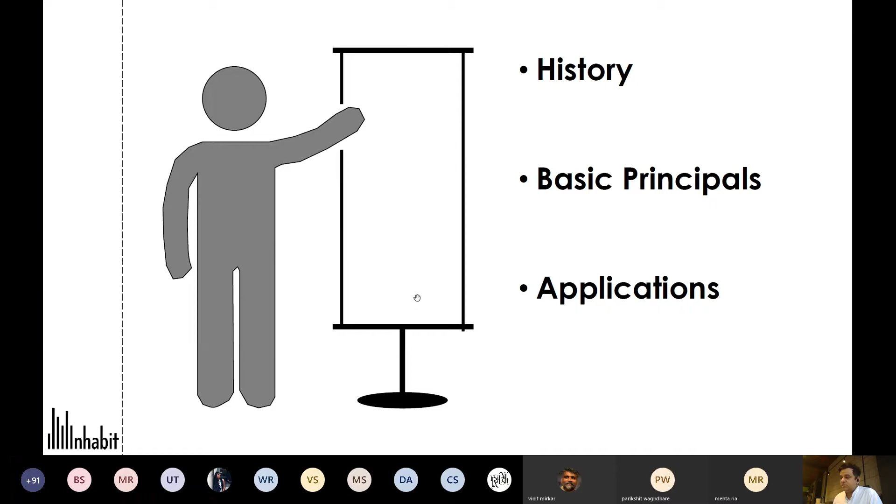Facades, as we know them today, have evolved from a large industrial revolution per se, a large evolutionary process from production to usage. And glass back in the days used to be something very simple, very ethereal, very divine, limited to being used in churches. Even castles of kings used to have very tiny windows, because glass was not available to builders as an industrial material per se. So we saw its very limited usage in mosques and in the form of stained glass in churches, which brought in this divine light, providing divinity to the space.

Glass's evolution into buildings started somewhere close to the early 1500s, when the float glass, the sheet glass that you can buy today for your windows or doors, was not available yet. So the glass blowing industry in Central Europe was the point of conception for procuring glass for buildings. They would take a blob of glass at the end of a stick, as in the image to the right, and keep spinning it till it reached a diameter of about 3.5 or even 4 feet. It solidifies, it cools, and then you would break it at the center point, and that would become your sheet of glass, a circular disc that you would use in your buildings.

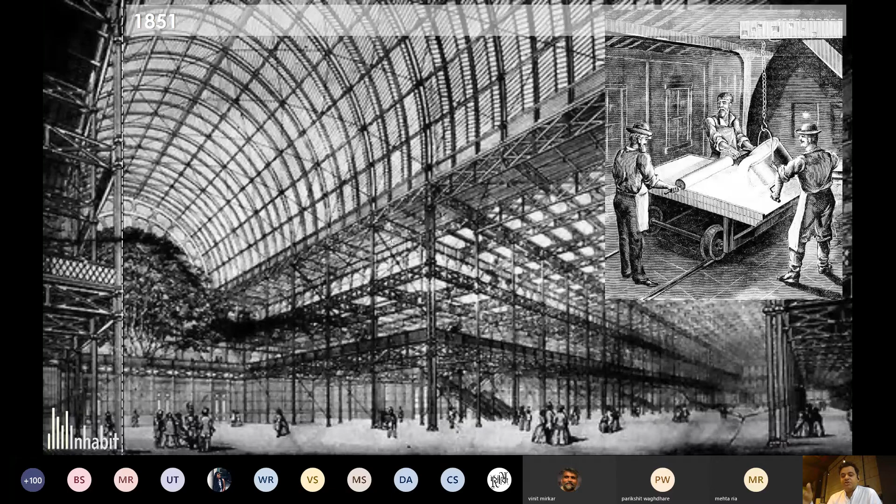Now, when the Industrial Revolution happened in the mid 1850s, steel manufacturing was at its peak. We were manufacturing steam engines, steel girders, large cast iron components, and the picture in the center is the Crystal Palace in the UK. The Crystal Palace is a great placeholder for facade engineering today because there were a lot of firsts that building achieved. It achieved prefabrication. It achieved the first use of glass in an overhead skylight and even on the walls. And given that they didn't have the technology we have today, the entire building was reverse engineered from the largest piece of glass that you could cast.

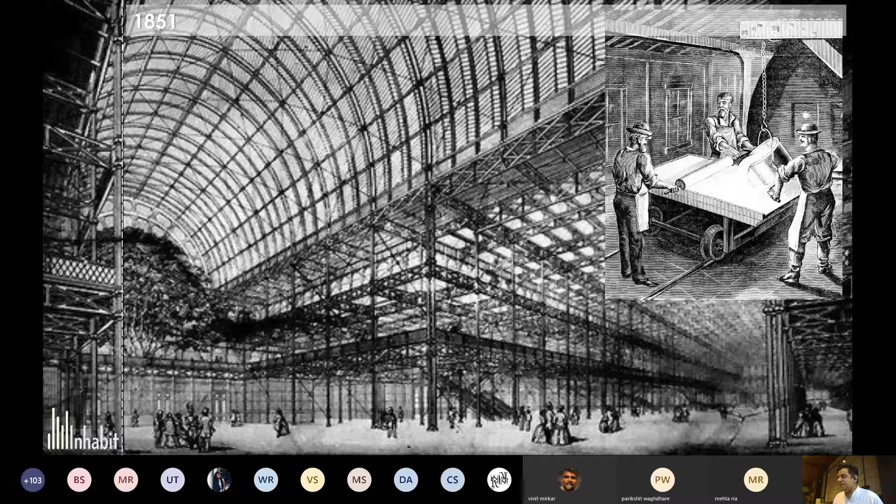The technology being limited, they would have people in an enclosed, fully insulated room. They would heat the glass to such high temperatures that it would become completely liquid, and then pour it into a large cast. By the time it solidified, they would start rolling it, and when it's completely solid, it's ready to be used. And there were obviously limitations on how big a cast you could make. So based on that, the entire building was designed backwards. And that's what you see here. All these panels are glass cast with this method, a simple timber cast that you would pour molten glass into.

Then came the mid 1950s. I think glass was still very, very limited in its usage, because the Crystal Palace was more of a power showcase that this is what the industrial world can do, but it still did not come into play in mainstream buildings. So buildings still had tiny pieces of glass, or no glass at all, or timber windows for that matter.

1952 came a big revolution, and I think we really owe it to this man. Alastair Pilkington is his name, and there's a glass company that runs by his name now, who invented the float process, the float bath process. Now, glass by itself was rolled, and then they started rolling it on conveyor belts, but that led to a lot of distortion in glass.

So you could see a very distorted image of the sky outside, or if you tried to look in, you would see a lot of distortion. So I think the clarity was desired, where you can see this pristine view to the outside or have that visual connect to the outside. So Mr. Pilkington came up with an idea where he basically floated a really semi-solid sheet of glass over a tin bath.

Now, tin has a lower melting temperature, so the higher melting temperature of glass always made sure that the tin is in a molten state, and it would just float it over tin and then pull it from the other side. That made sure the glass was really flat, and then the rest is history. Mid 1952 onwards, we've produced glass with the exact same method, even till now, 70 years down the line.

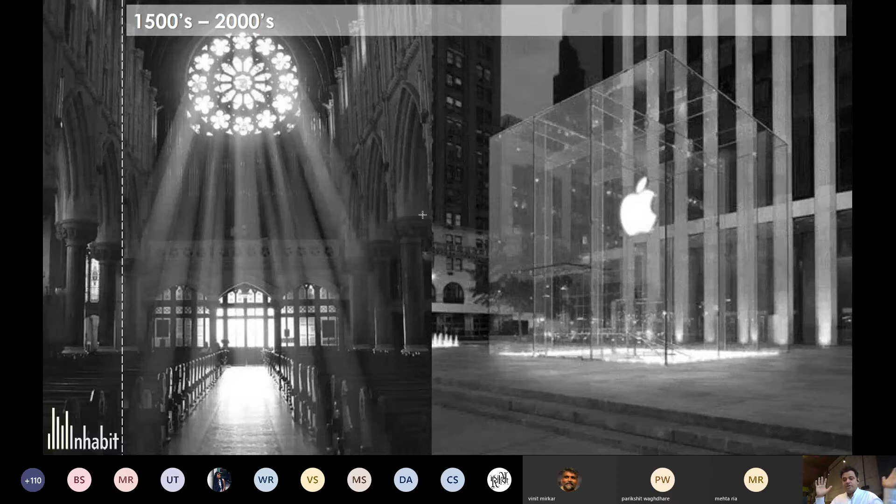So from the early 1500s, where we would spin a disc of glass and try and cut little pieces out of it, put them in our windows, all the way to now. I mean, the Apples of the world are basically using glass as a structural component by itself. There's no visible steel, there's no visible concrete. We have started to understand the material a lot better. We've started to understand the processes that make it structurally more superior, environmentally more superior, for us to use them more extensively in our buildings.

So that I think sort of sets the context of where we are currently in terms of technology, and how we are going to use that, and based on our understanding, what are the basic principles of curtain wall design or external facade design. So the first component that I will walk through is the outline principles of all the different factors that we need to keep in mind while we're designing facades. So this is what we call a typical hierarchy of all the design parameters that we need to take care of.

So normally what happens is you need to make sure that the facade is structurally sound. It should be able to deal with winds from the outside. It should be able to take loads from the inside if someone leans on it, if a child throws something at it, etc. And it should be able to sustain the building loads moving left and right. It should not warp or it should not D-shape itself. So structure is obviously important because if the facade doesn't stand, the next stage doesn't arise.

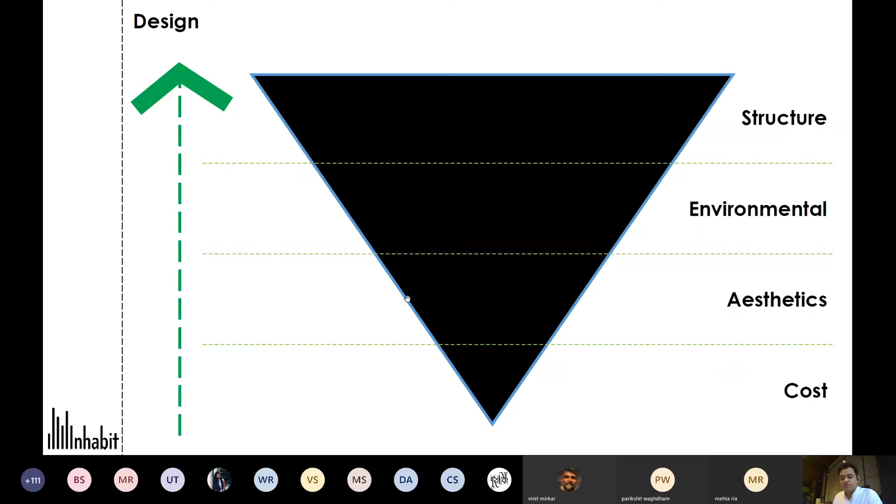In our experience, what typically ends up happening is this. We start with a budget, and this is the hard reality here. So we start with a budget. This is how much I can spend, and here's my render. This is what the building needs to look like, and then I want a LEED Gold certification, and then yeah, you deal with the structure. So the right approach is to start with structure, and then obviously look at the cost as an element, and then if required, you revisit the entire cycle again. But unfortunately, this is the sequence that normally gets followed.

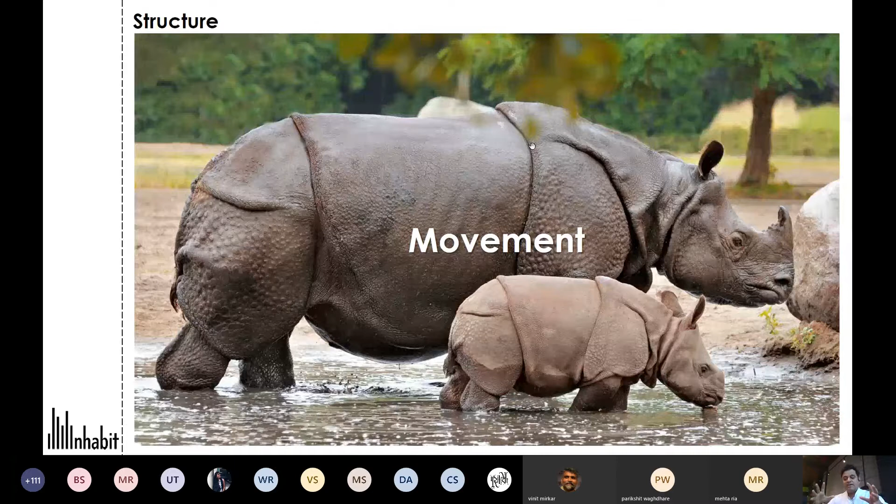I mean, the rhino is a fantastic animal. You can imagine the ground it sits on is the earth you build on, and with any kind of geotechnical forces or seismic forces, the rhino basically just moves around to adjust to them. The body of the rhino, the bones, the muscles, etc., is the structure, and the skin is the facade. Now you suddenly start seeing there are little folds on the skin which basically move around and about. Now they are not restricting the rhino to move; they're actually giving him a very robust outer shell. But when he moves around, the skin folds over and moves around and about, to allow for movement, but at the same time give him a nice robust shell on the outside.

So we'll look at the first principle, which is the building structure, and how do we cater to different movements or different parameters that the structural engineers provide to us. So structural engineering will be another session for you guys, and a lot of this will link back to what my colleagues from the structural engineering team will share with you.

So first, a very important aspect with tall buildings is wind gets faster. Wind has less resistance at a good height, so it actually hits the building face on. And then that has an impact on the design of the facade based on the way the building moves and also the facade's own structure. So the facade obviously has to be self-supporting, and when the building sways, like a rhino's skin, it has to be accommodating that wind movement within itself without taking any stress or any strain of the building's movement onto the facade element itself.

You have live loads that come into play. Suddenly someone decides to put a grand piano next to the window, and that will have slabs deflecting, etc. There'll be user loads where you have a large party and that will have some structural impact. There will be dead load impact, where you have a short-term settling, where the entire weight of the structure will make the building sink slightly, and the columns will shorten slightly, and there'll be a long-term usage creep as well.

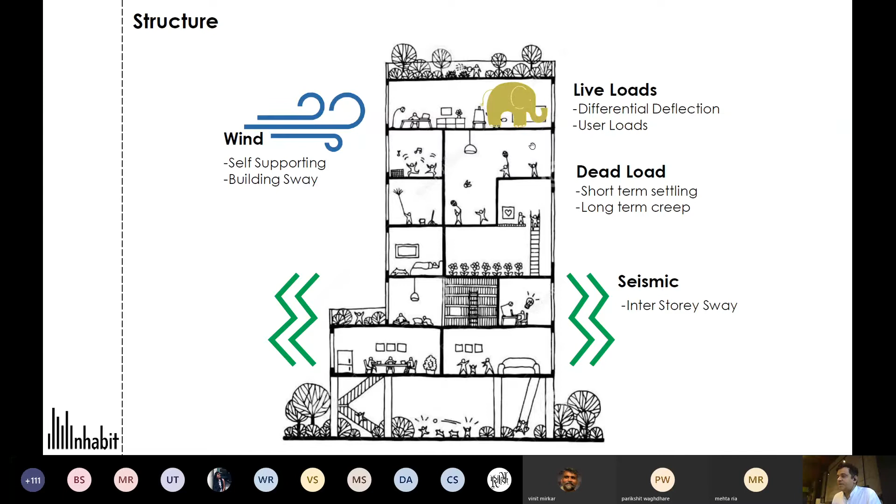So normally when we talk about high rises, the choice of system is based on the feasibility of design and installation. And normally when you look at high rises, you see them fully glazed, and the choice is not because the architect wants it glazed. The choice is because you want to install something that has the minimum amount of site work involved. So we choose a curtain wall that basically gets installed from the outside.

What you see here is a typical panel that gets installed between floors, and then there is a movement joint. So there's a stack joint which is allowing some movement here, and there's another stack joint that allows some movement here. Now, the vision component, which you look out through, the piece of glass that brings in light and allows visibility to the outside, is anywhere between the floor level all the way to the beam soffit level. Anything above that, that covers your services and your structure, is what we call a spandrel.

So that is basically the composition of a single unitized panel, and the joints are really important. That's how you design them, to allow for any thermal movements or the building's physical movements or any differential load movements, and I'll come to why that becomes important in a second.

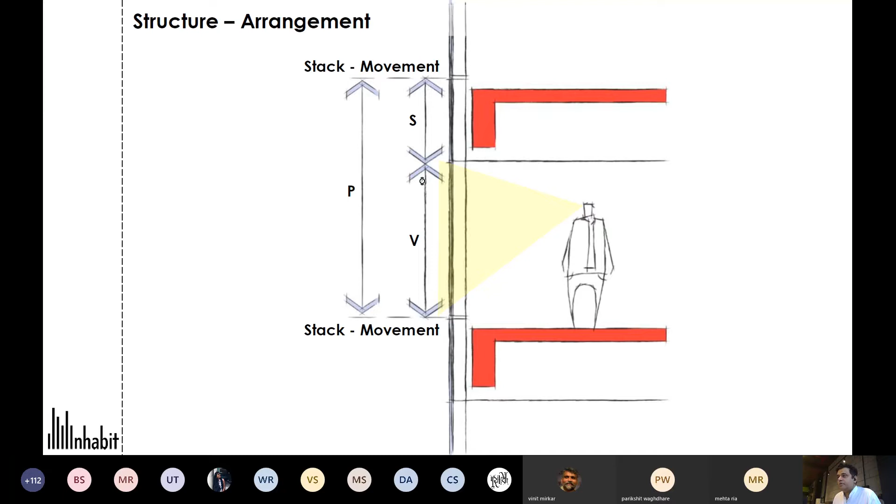So the first component obviously is the dead load and live load. The structure will shorten itself over the course of years, and there'll be times where somebody may decide to put an excessive load on top. Parking structures suffer this a lot, where someone decides to park a Rolls Royce next to the parking block, and then suddenly the slab deflects there. The idea here is that if the slab deflects, this panel moves with it, and that allows for movement within the stack here.

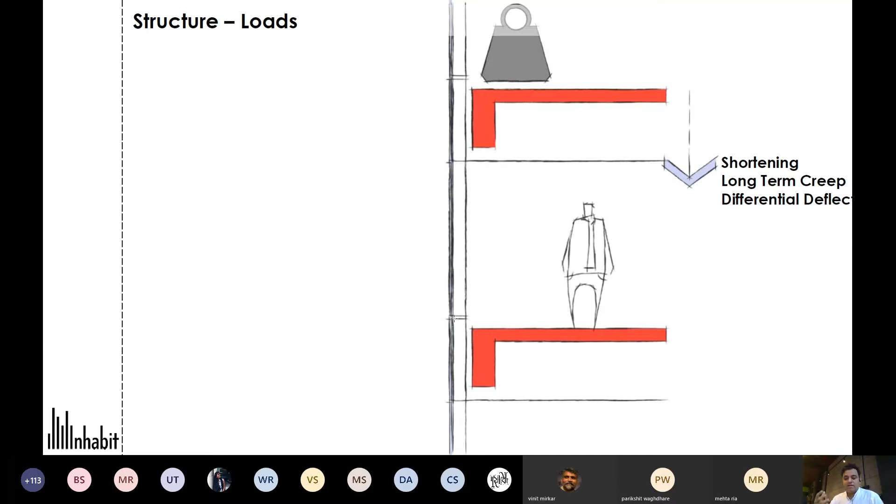So the entire thing, like I said, is the skin of a rhino. There should be enough movement allowance there for you to be able to take any load or any unpredictable behavior of the building.

The facade obviously has to be self-supporting. So between floors, you have to design it in such a way that these independent units can deal with external wind loads and internal barrier loads, which become very important in buildings that are public in nature, where suddenly, to see the fireworks outside, a lot of people start leaning on the glass. So it all has to be designed for those sorts of loads as well. So we talk about fiber stresses in the material. We talk about deflections that should be within allowable limits.

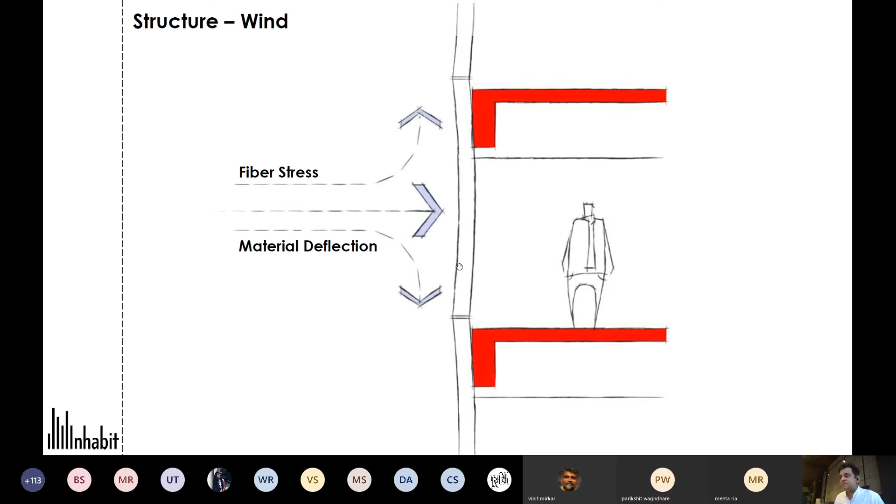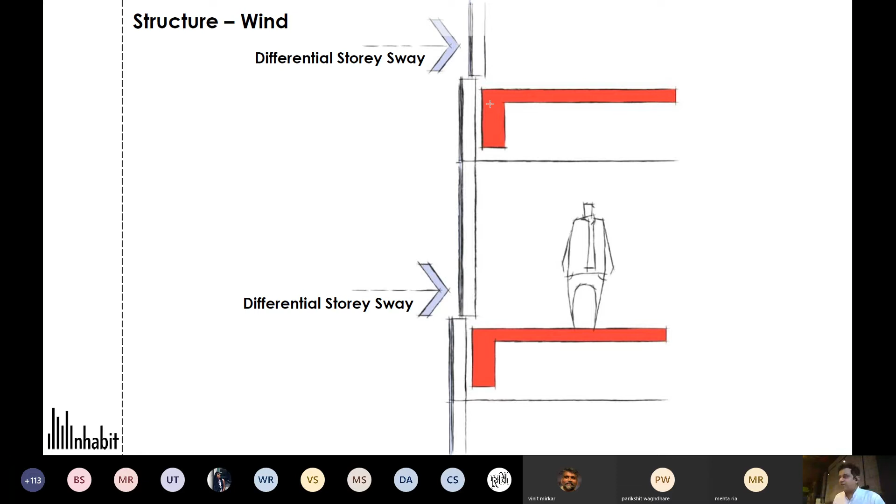Buildings sway differently, so it's hardly noticeable, but the behavior of a building is very different under high wind velocities, where it tends to sway left and right, which means one edge of the building will start to curve, and that will basically make the facade panels start to open up a little bit. So differential story sway: one story may sway by a few millimeters more than the floor below, or the one above may sway outwards by a few millimeters more than the floor below. All that needs to be accommodated, and that's where the play of these panels comes in.

Seismic is another different animal altogether. It's another different building load criteria, which behaves very differently. In a seismic event, the building floors actually tend to go in opposite directions. So one is going left, the one above will go right, the one above will go left. So there'll be very quick succession movements happening in the building, and the facade has to be designed to accommodate those loads.

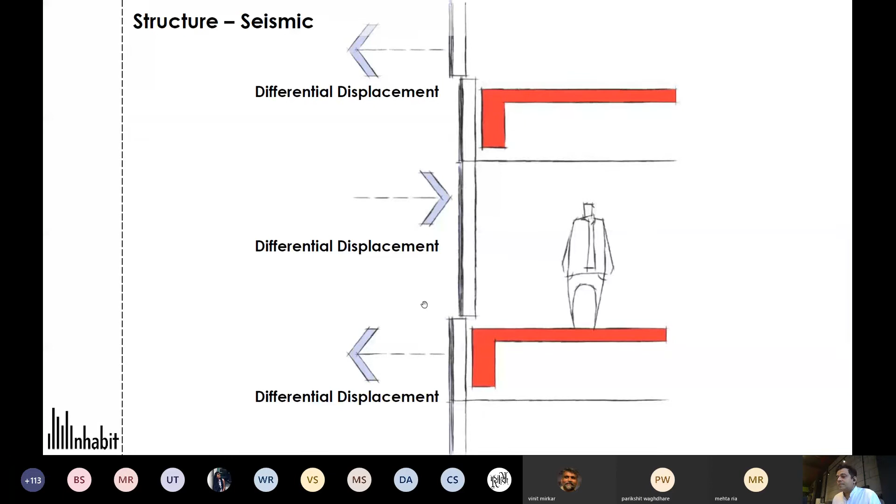So these are the structural design criteria that you need to be mindful of. The second component is again extremely important, because your facades are the first line of defense from any harsh external environment to the environment that you want to create on the inside. And this is not just limited to the elements on the outside, it's also to do with fire, it's also to do with explosions. I mean, we live in a world full of threats right now. So what if a bomb goes off next to your building? How does that impact you on the inside?

So there is rain, which is a factor. In the place where we live, we see leaky windows everywhere. So obviously the facade has to be watertight. There are potential opportunities for rainwater harvesting as well, because the facade is a really large surface area of your building, and as the building goes taller, the opportunity of harvesting water on the rooftop is very, very limited, but you can actually do more of it on the facade.

In terms of solar performance, the sun not just gives us light, but it also leads to a lot of heat gain. And the higher you go, the less are the opportunities for you to have outdoor spaces, because the wind can really cause havoc. So having a balcony at the 70th floor is less and less feasible. So the facades tend to be very closed down with very limited ventilation opportunities. So again, you need to make sure that the sun does not heat up the internal space. So the sun obviously brings in daylight, but it also brings in thermal gains.

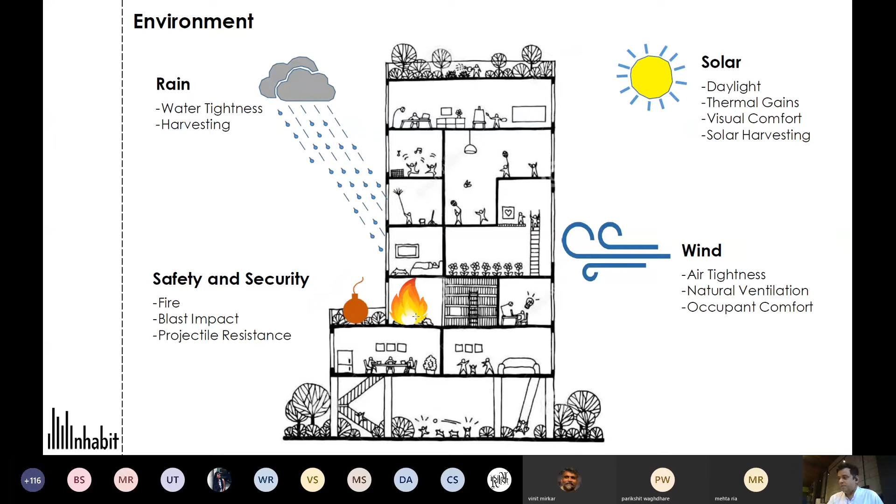At high rises, at really tall heights, especially sky terraces, etc., the wind can be an uncomfortable factor as well, where it's sometimes too high speed for us to feel comfortable there, because it basically pushes people around. So let's look at each of these elements in a little more detail.

So when we talk about the solar factor, or the sun's behavior around the facade, there are two key factors that we consider while designing facades in a tropical climate like ours. One is conduction, where outside is 38 degrees, 40 degrees, and inside is a comfortable 22, 23 degrees. And because there is a temperature difference, there's a delta. The facade will tend to conduct that heat and then radiate on the inside. And that is defined by U value.

U value basically defines what is the conductivity of your facade. The lower the number, the lower the conductivity. The higher the number, the more it is conductive, and the more it actually adversely impacts the performance of the facade. Now, in tropical climate specifically, we are blessed with a lot of sun right through summers, not so much in monsoons, but winters as well.

And one of the factors that really impacts the design of buildings here is how clear your glass is, or how much radiation it allows to come through. So conduction is purely temperature outside, temperature inside, the delta, and how much conduction happens between the two. And then radiation is where the light shines right through the glass, hits the surface on the inside, and then heats the room that you're occupying. And radiation is defined by a factor called the shading coefficient.

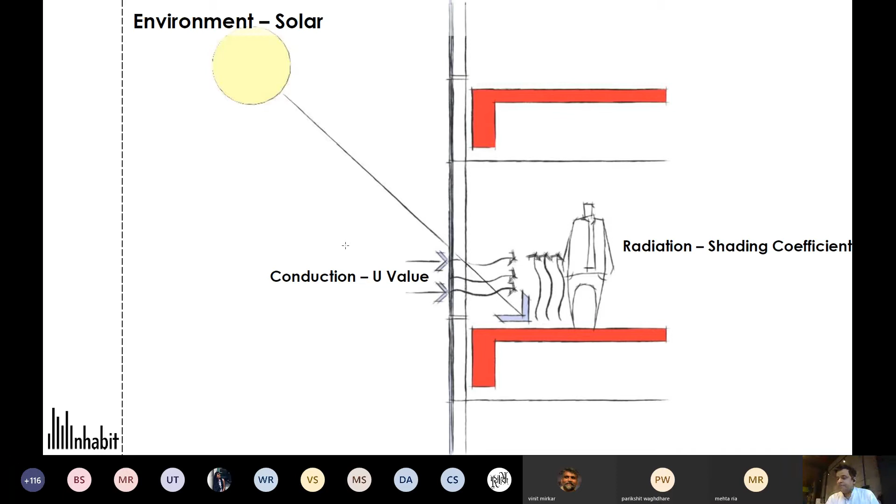Now, shading coefficient is directly linked to the performance of your glass, which may have some tint to it, which may have a performance coating on it. And in some cases, because glass is now being extensively used on buildings, a lot of architects and environmental engineers and people like us even come up with shading strategies where we have external projections or vertical fins, depending on what orientation your building is in.

So improving insulation means lowering the U value. Now, by lowering the U value, you would need to introduce lower metallic exposure to the outside. You might want to use double glazing instead of single glazing. You might want to introduce argon gas infills or other inert gas infills in the cavity.

For external shade, for lowering the SC value, like I said, you can actually improve the performance of your glass, but given the extensive use of glass, there may be a secondary strategy of introducing external shading as well, which again lowers the SC value. Now, I know there are most speakers who will talk about green buildings, about environmental performance as well. They might go into how to orient your building correctly. So we work hand in hand with them to find the best orientation, and then we work out the best shading strategy for the building.

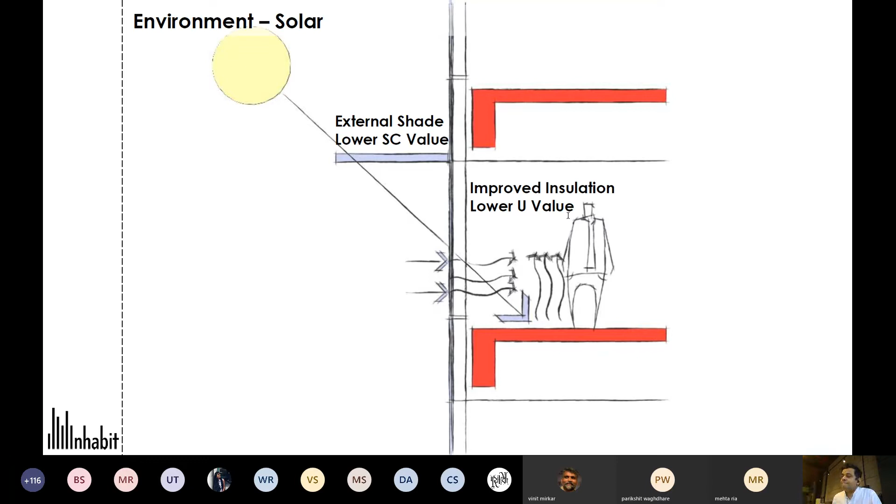Environment: watertightness is extremely important. People do not like leaky buildings, leaky windows. Water you want to keep out as much as possible. So for that, the facade has to be externally drained. Now, with unitized curtain wall per se, what we see here, each of these individual panels is designed with multiple chambers within it, and we can probably have another class on how it actually behaves in an external water exposure. Each of the panels is designed to be drained externally as much as possible.

So if the water comes in, it does not come all the way in. There are a few barriers before it comes in, and by the time it goes down, it gets spit out of the building. Another important factor, which is to do with aging of the building, is the facade should not have any perfectly horizontal ledges, because in an Indian context, there's a lot of environmental floating dust. There's a lot of suspended pollutant material, which tends to sit on these ledges, and every time it rains, it drains down, streaking the facade.

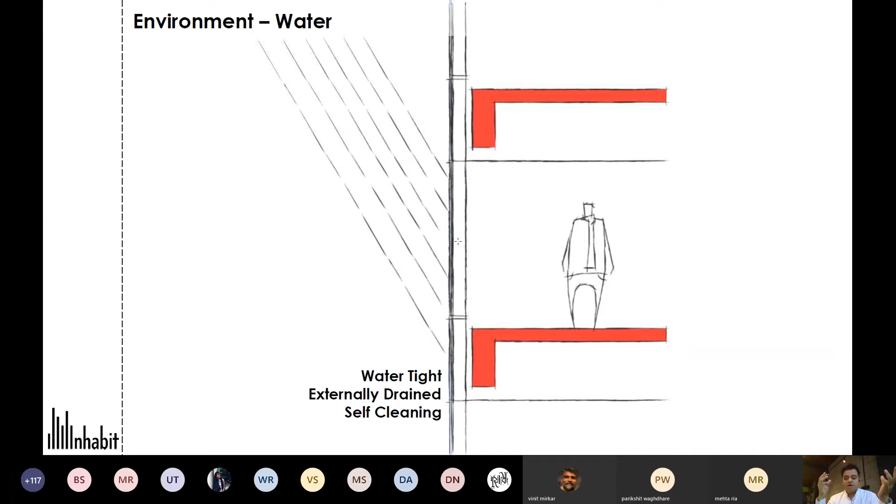So the intention would be to have inclined ledges, inclined shades, inclined features on the outside, so they have some level of self-cleaning nature. Even having the right materials is very critical. So having coated aluminium rather than marble or other stones, etc., I think that becomes equally important.

Air tightness is critical in places where you want them. So there are building typologies where you have very air sensitive, IAQ, indoor air quality sensitive spaces like data centers. Offices are equally sensitive about it because they want to cut back their air conditioning consumption because they don't want to lose that air to the outdoors.

There is another new concept that's evolving in residential buildings in high rises, and we've done those in a couple of buildings here, where instead of having operable windows, because if you open your windows, your curtain starts flying, papers inside will start flying, and it'll become rather uncomfortable. So what's now being done is that there's an opportunity to introduce passive ventilation. So there are these little slits in the window system itself that allow a fixed rate of air exchange from outside to inside. So you do get the fresh air.

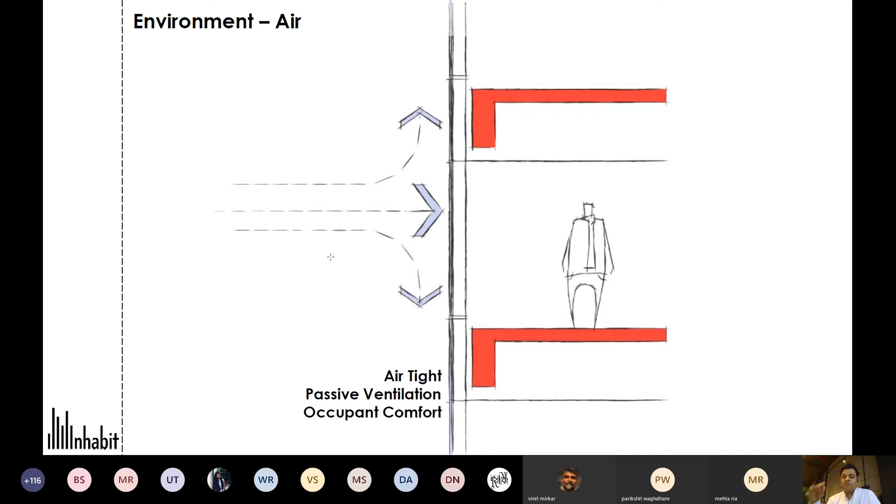The benefit of staying in a high rise is that the air is cleaner up there. So you can turn your ventilator on or off based on what your needs are. If you have the air conditioning on, you turn it off. On a day where you want some air exchange happening, you turn it on again. And that sort of allows for a good level of occupant comfort without having really speedy winds running through your apartment.

Environmental safety is important, and more so now, given that we've seen so many fire incidents in the recent past. First port of call when we choose facade materials and the high sensitivity involved around it is that we use fire resistant materials, materials that do not catch fire.

One thing that's increasingly becoming popular, and more so in hotels, which are unfortunately a target of all the terrorist attacks, and also in public buildings and government buildings, is that there has to be an assessment done of the threat of a blast. So what comes into play there is, okay, what is the blast impact that's feasible at a certain stage? How far can you filter out people? And then a small bomb that can slip through the security and then it goes off at a certain distance from the building before you can mitigate it.

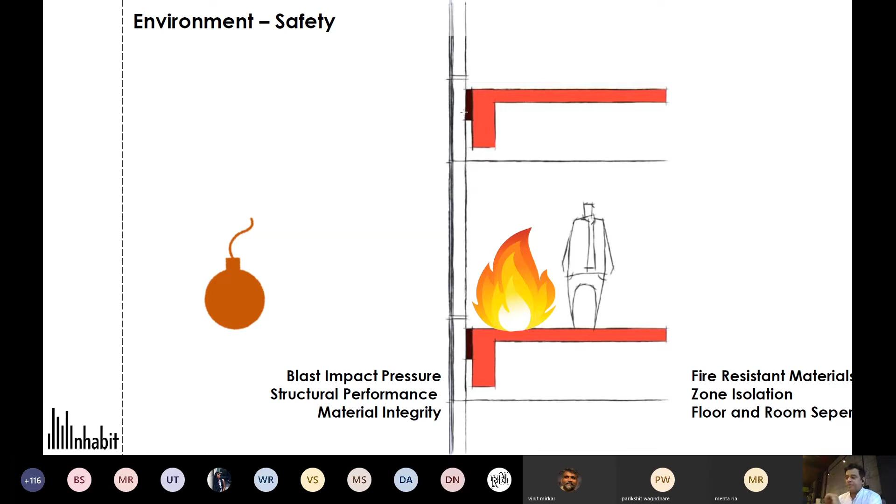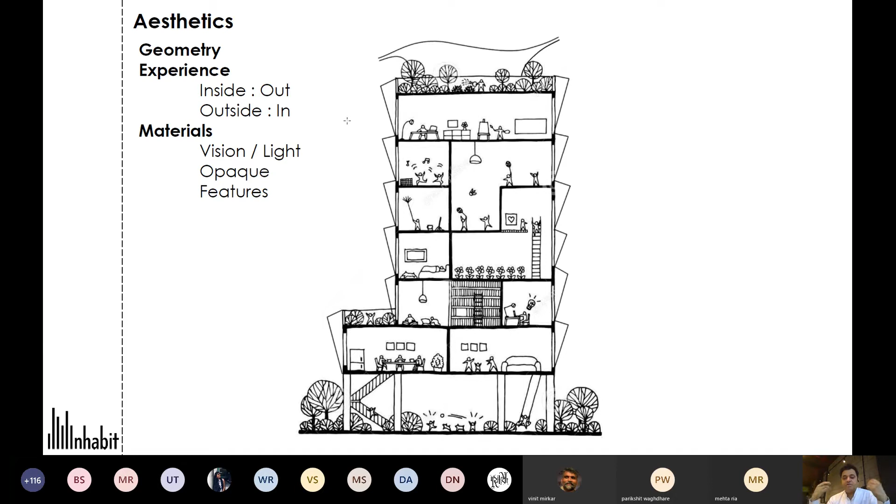So these were sort of outlines of three of the parameters: one, structure, environment, and finally aesthetics. Cost is a completely different subject, and I just probably have one slide to express it. So I think we'll start with how does it get built. So now is the time where we've actually done the entire exercise, and now we talk about the systems that are used to achieve those visions.

So the first thing we do is rationalize the entire building for manufacturing. Building facades are a part of the industrial manufacturing process. They all come from a factory line. So the more rationalized they are for production, the more cost effective they become, the easier to fabricate they become, the faster to install they become.

So the job of people like us is to sit with the architects, and obviously there's this level of randomness that's desired in a building where you may have different shapes and forms, but we try and rationalize it or package it together. And there'll be a couple of examples that I'll walk through during my presentation, which show how it's done.

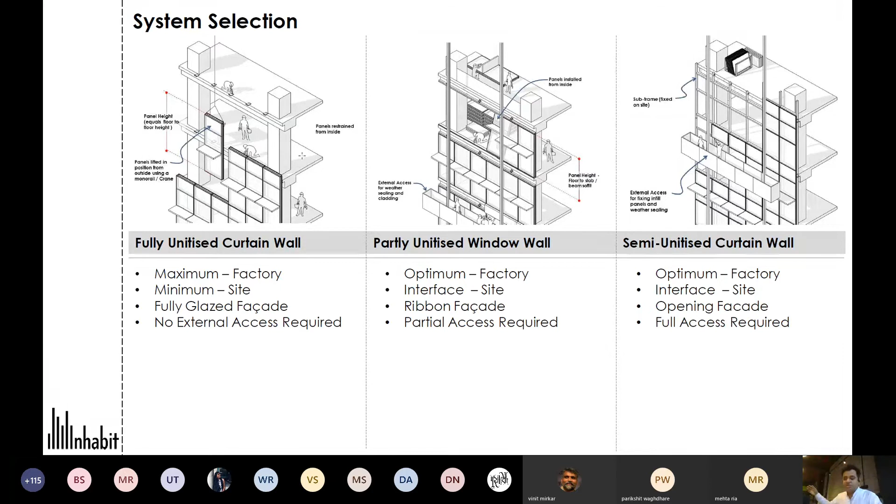So this is the outline of the three sort of most commonly used families. There may be some interface between two. So out of A, B, C, you may have an A1, A2, A3, B1, B2, B3, C1, C2, C3, and so on. So how about the cost? Now, cost really depends on what kind of systems you choose, what is the extent of the application. If the building is really tall, a unitized system, however expensive it may sound, may be actually a wiser choice and may save you more money in the long run.

But for a smaller building, a ground plus two commercial building or a retail building, there the choice can be a little more stick driven, because the components can be brought to site. You can still have a robust external access. And then what kind of skills do you have available in the market? India is a labor rich market. Again, the quality is really questionable, but then you get cheap labor. For a smaller application, having a piece together approach makes more sense versus unitizing it. But for high rise, it makes a lot of sense to have a highly modular approach to the building.

So that basically sums up the outline key drivers of how do you approach a building's design, and based on what factors do you arrive at a certain decision, which may affect its aesthetic, its performance, its size, etc. Now based on these, how do these get applied to different projects? So I have a couple of case studies here, fairly international projects where I was involved, and how those decisions got made based on the challenges that came to us. So in one case, there may be a very complex surface that needed to be rationalized or resolved. In another case, the program was really tight, etc. And you will start seeing a few of these system examples being applied on these particular projects.

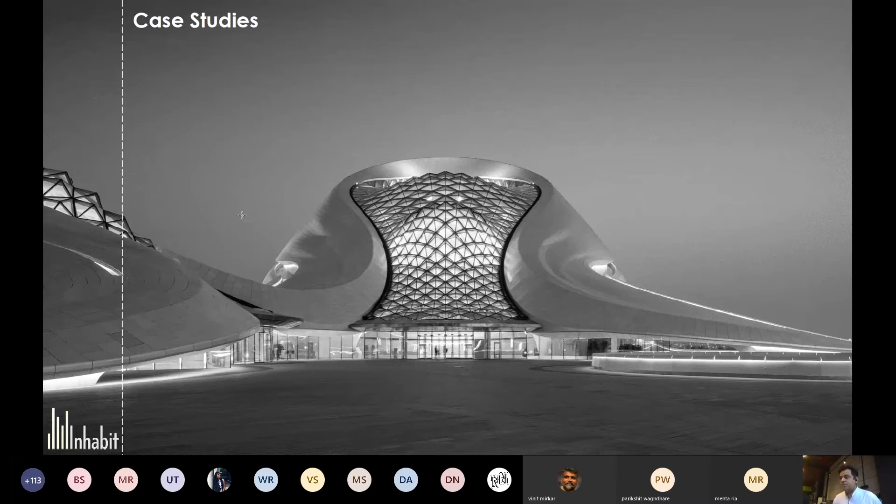So I'll start with the super tall, given we are talking high rises, particularly for semester 7. This is a project that's currently shelved. We finished the entire design for the project. This is a public building owned by Pertamina Persero, which is the largest oil company in Indonesia. And the building height for reference is about 523 meters, a little over half a kilometer. And at completion, this would be the tallest building in the Southern Hemisphere.

So the building is about 523 meters by itself, but what's not really evident is how complex it is in its geometry. Now, the building has an I-shaped plan, and it's a straight extrusion all the way up to this point, which is roughly 320 odd meters, and then it starts to taper backwards. So the I shape also reduces its profile in plan, and gradually also leans back. So there's a twist that happens in the facade. There's a double curvature that starts getting achieved. Now, 200 odd meters is a typical building in Mumbai. Now imagine that building sitting on top of a 300-meter building. So that's a project almost being built in the sky.

So we basically got a NURBS curve definition from the architect of how the geometry is derived. And the first problem we identified was, okay, all of this needs to be double curved panels. Now, the intention here is to actually have a facade that's fully panelized. There is no other way you can build something 300 meters up and then for 200 meters more in the sky by piecing it together one by one. So the first problem that we identified was the facade's going to be double curved.

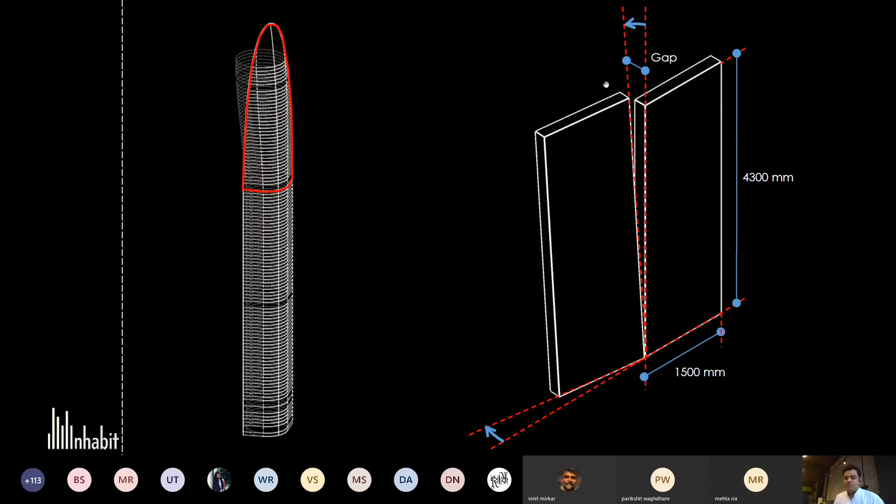So the first thing we identified was that if you try and stack panels next to each other and we lean one panel backwards, you would create a gap here by pushing the one edge of the panel backwards. Now, how do we achieve something like that? By making it weather tight, but also keeping it very cost efficient and also aesthetically pleasing, because again, the experience from inside needs to be equally important as it is from the outside.

So we looked at a few ways: how do we resolve and rationalize the geometry? So the first thing would be to triangulate the whole geometry, for some of the geometry enthusiasts in the audience here, which is to basically fold it at a diagonal center, so you can start faceting the entire geometry without having any curvature in the geometry, but then you're still able to span the whole surface.

Now the thing with triangulated geometry is that it's feasible, it's doable. Aesthetics will go for a toss, because suddenly from inside looking out, you'll start seeing a diagonal member running through. So it'll almost look fun. Cost is doable because it's still flat panels and you can still rationalize the geometry to an extent where you don't have to use specialized profiles, etc.

The second alternative was to bend it. Feasibility was questionable because not a lot of fabricators, not a lot of glass suppliers can actually allow for that level of curvature in the panel. Aesthetics looks fantastic. I mean, from inside out, it's just a nice seamless curved surface. Cost obviously goes through the roof. So again, that's a big question.

The other alternative that we explored was window walling it or ribbon facading it. So the plan will have the curvature profile, but when you cut a section, it will have these steps back. Now, feasibility, it's doable. You just need to have that tiny bit of external access to seal it from the outside. It's still unitized to a good extent. Aesthetics will go for a toss because suddenly up above, you'll start seeing a slightly different geometry than the rest of the tower. Cost, again, is doable because it's still panelized, still flat, still vertical.

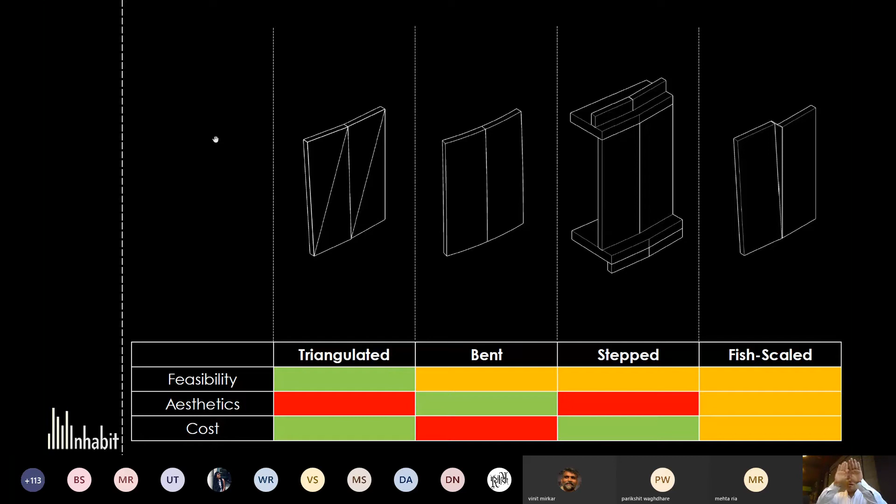And then the final option that we explored was that if the panel is warped slightly, creating that gap, why don't we fill that gap in between and still panelize it in a way? Again, feasibility was questionable because very few contractors had done it around the world. Aesthetics would go for a toss because suddenly you'll see different reflections of the sky. And then cost again is questionable because there'll be a specialized component required at that interface where you have that little triangle getting formed.

So we looked at examples of what we could do. We looked at a couple of our own projects, some other non-Inhabit projects abroad, where cold bending was done. Now, what is cold bending? It's basically a glass panel that's warped out of position without using any heat treatment, and it can be done on site as well. So basically, the intention here was to have the two panels that force away from each other to create the geometry, and then pull them and connect them back together by force.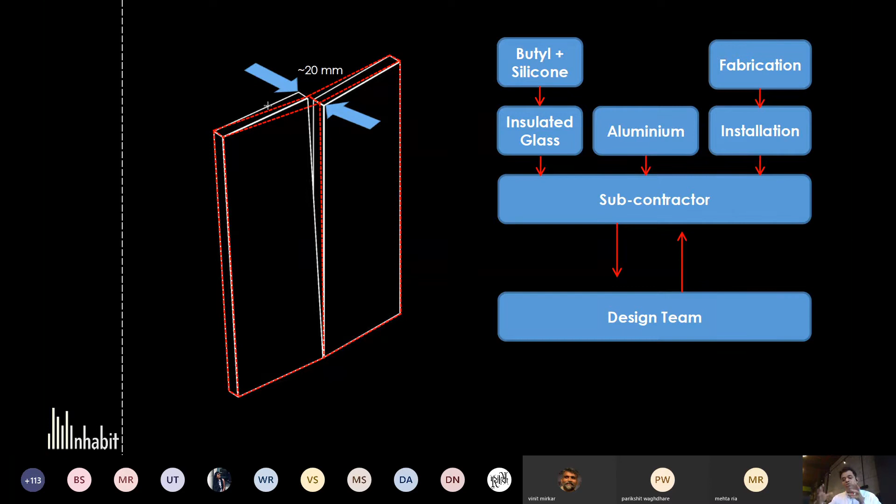And that appeared to be a feasible alternative because it still maintains the cost of a regular panel and allows you to create a geometry by just stressing the panel out of position, which makes it stronger as well.

The other thing that's extremely important in very complex geometries, or rather organic geometries, is trying to rationalize panels. So the intention is that every time you have more number or more typologies of panel, it can throw a spanner in the works for somebody who's fabricating it. So the types of the panels, number of panels increase, and every time you have one panel broken, unless you find the replacement of that, you cannot continue installation.

So there's a panel group exercise that we did. All of these gray panels in the center, based on the original intent from the architect, were different, were very unique. So each of these gray panels is its own shape and size. It does not have a cousin or another identical panel somewhere else that can replace this one.

And based on just simple stacking and simple staggering of the panels, that allowed us to actually reduce the panel groups to 96. Repeated panels almost doubled in number, and unique panels got reduced to a small fraction of what they were before. So again, it's an interesting exercise that we've been working on with architects. Some architects really come up with these ideas themselves, and we basically help them out.

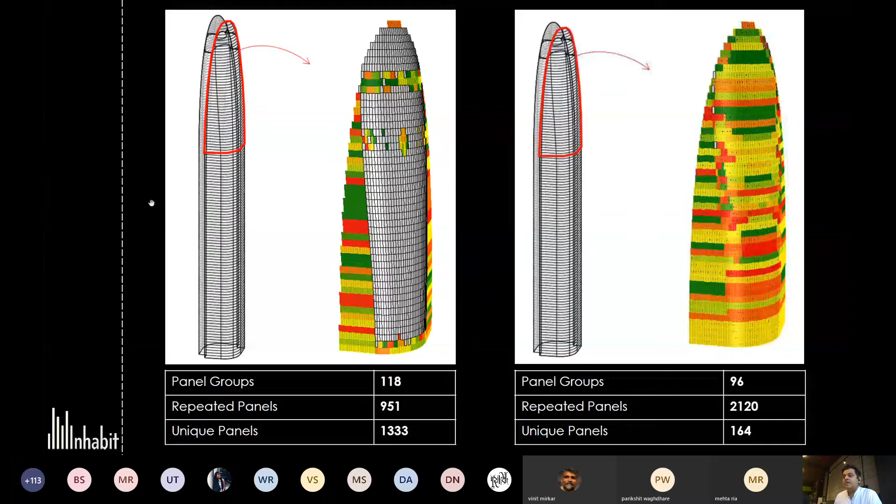Looking at a few other materials. So that was basically a super tall example of how problems in super tall differ from other buildings. Now we look at a boutique example of how a very commonplace material gets applied in a very unique way, a very non-common way.

This is a project in Sydney, and this overlooks Hyde Park, which is the Oval Maidan equivalent of Sydney. Now the building is here in the center, if it's not clear, and there's these horizontal ribbon features which form the balconies, or form these floor identifiers or floor markers. What's not clear from this image is that the first 3 floors are made out of stone. Now stone obviously comes in blocks, comes in flat panels that you can install on your floor, you can install it on your facade, and it gives you a nice clean flat surface with a stone geometry.

But in this case, Tony Owen's team was really hell-bent that they wanted to get this organic shape out of the geometry. Now, stone may not be the most friendly material to achieve it. There's other materials which allow you to achieve a geometry like this with more ease, but stone was really locked in. And the intention here was to actually showcase the material in its own unique form. So the first port of call there was to try and rationalize the geometry as much as possible. And that is to make sure that you always have less panel types and more number of panels of one type. So that's the outline that we always go with.

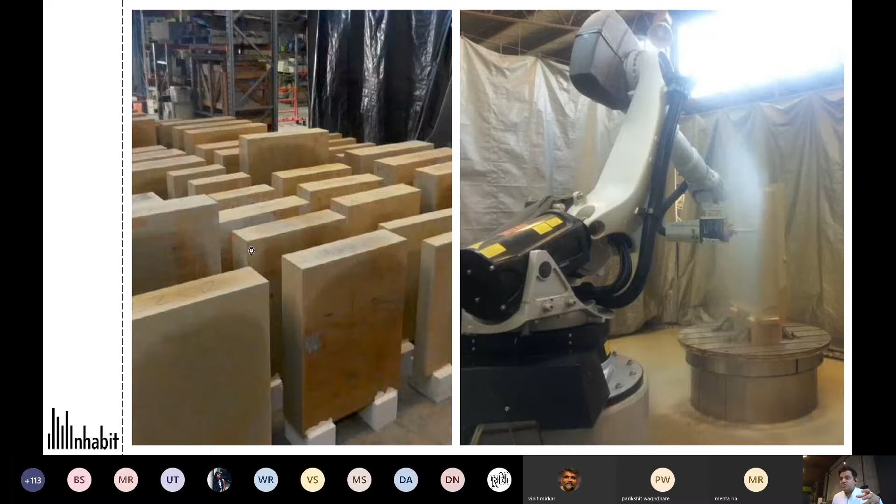So the intention was to basically slice the building in half. It's bilaterally symmetrical. So if one panel breaks down, you have another spare always to install it back in. And also to reverse engineer the entire facade so that it starts fitting within the bounds of the stone availability as well. So the stone quarry will always give you stone in certain block sizes, in certain cut slate sizes, etc. And based on these panelization types and what it can be carved out of, or machined out of, we basically provided a block schedule to the stone quarry manufacturers, where they basically cut each block to size.

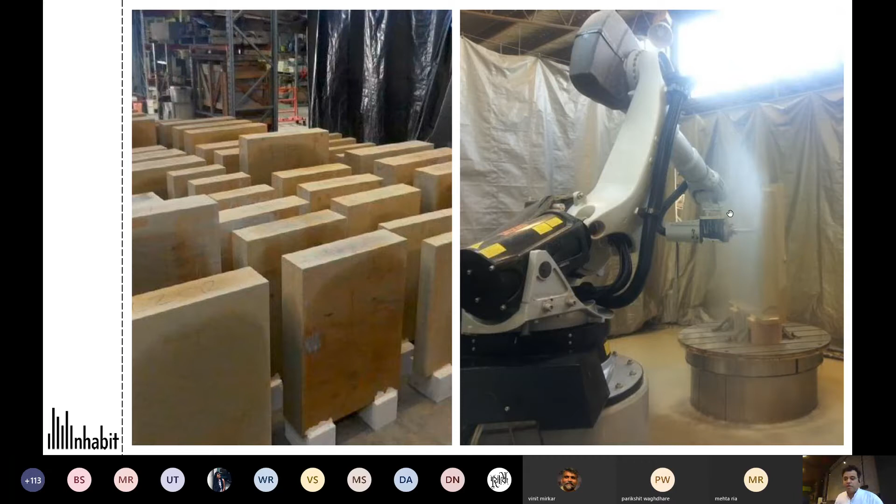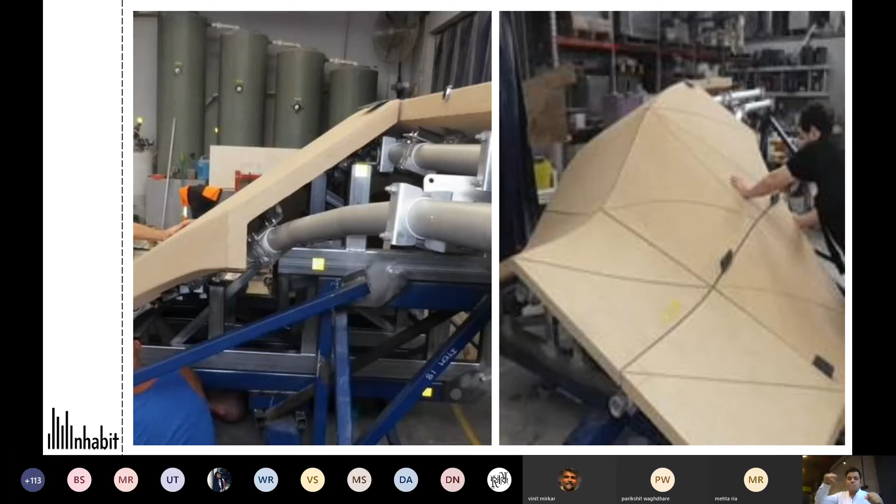And then there was a 5D CNC milling machine, which basically ate away the parts. It's almost like sculpting with a machine. It basically ate away the parts you do not require. And it gave you these 3-dimensional panels, which basically then get laid over a framework module, essentially. And that's built out of tubular modules, which are all bent to shape. You place the stone, you secure the stone.

And again, the intention was to have this as modular, as unitized, as panelized as possible, because you can't possibly have a scaffold that starts from the ground, disturbing all the retail environment downstairs. So the idea was to have these panelized. You lift a panel with the framework integrated, with the panels on the outside integrated, and you drop that in position, and that's it. Every floor just has 4 panels that need to be installed. So a truck arrives in front of the building, the tower crane lifts it, drops it in position, and you're done. The truck then drives off. So it's a 5-minute installation process.

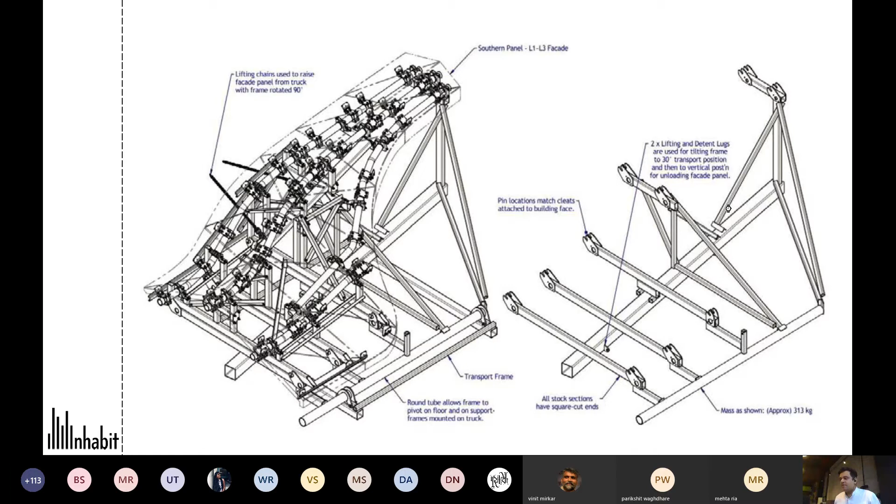So these were the rigs that we designed, which basically have just 2 pivot points, which allow you to lift the panel up, engage it with the tower crane, and then lift it up. And then these are the panels that are ready to go to site. So all of these are fully integrated. These are the end pieces, and then there's 2 more pieces that are in the middle, in the center.

Now, again, moving back to high rises from the same city, Jakarta. Now this building looks a very plain Jane building, but the client's brief in this case was to have a building that's more experiential from the inside than outside. People who are paying to occupy the building should have a better experience, and it should not be just for Instagram where you take a nice picture, upload it, and the whole world says wow. So the intention behind this building is to have a very clear view from inside, to have as large modules of glass as possible, with as minimum interruptions as possible.

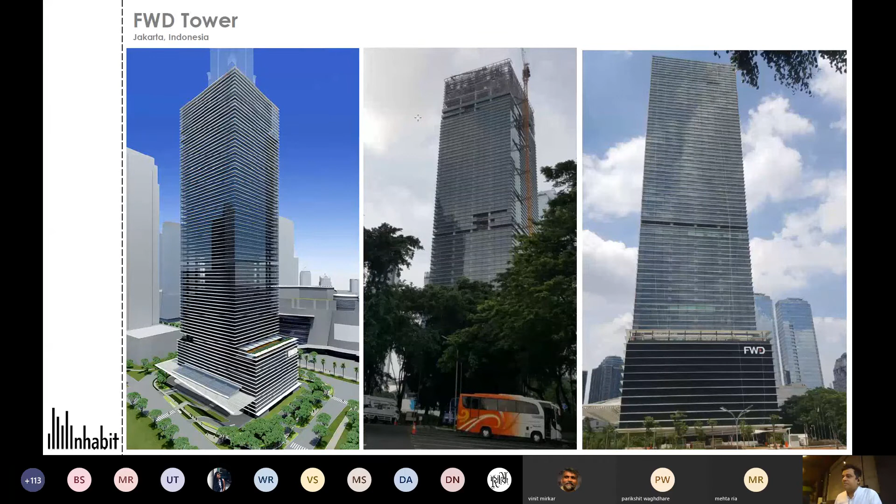So the intent here was, when we do a typical unitized curtain wall, now I come back to that whole subject of panelizing the facade. So this is a more 3-dimensional representation of the diagram I'd shown before. So you have a spandrel that covers your slab. You may have a vision that is divided into the bottom half and the top half. And then you have the panels that get hooked on every floor, floor by floor, completing your building ground up.

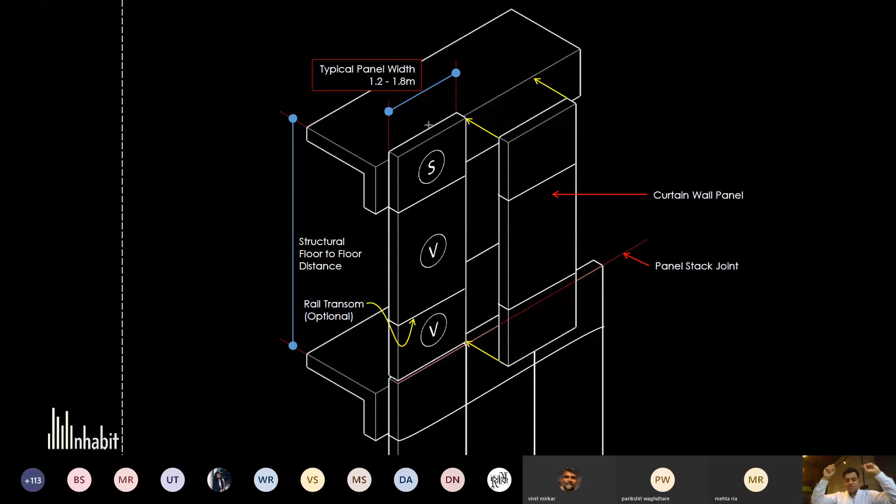Now, the typical panel widths that we tend to work with, and we also advise that the mullion spacing should be in the range of 1.2 to 1.8 meters. 1.2 works really well because it also sometimes aligns with the ceiling grid of your 600 tiles on the inside. 1.2 sometimes also works really well with furniture arrangements or room dimensions, etc.

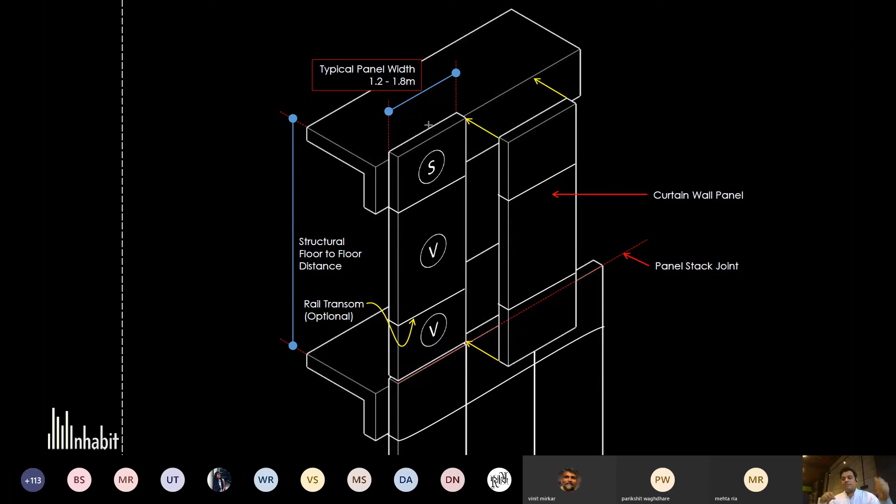It could be 2.4, 3.6. Or if you aim to have larger panels, you should not try and go beyond 1.8 meters because that still is within the limits of hoisting a panel. Now, in this case, the client really wanted the building to be more experiential. Like, no, 1.8 does not really cut it. 1.8 is still too many frames vertically. And when you look out, there's a lot of disturbance, there's a lot of visual clutter.

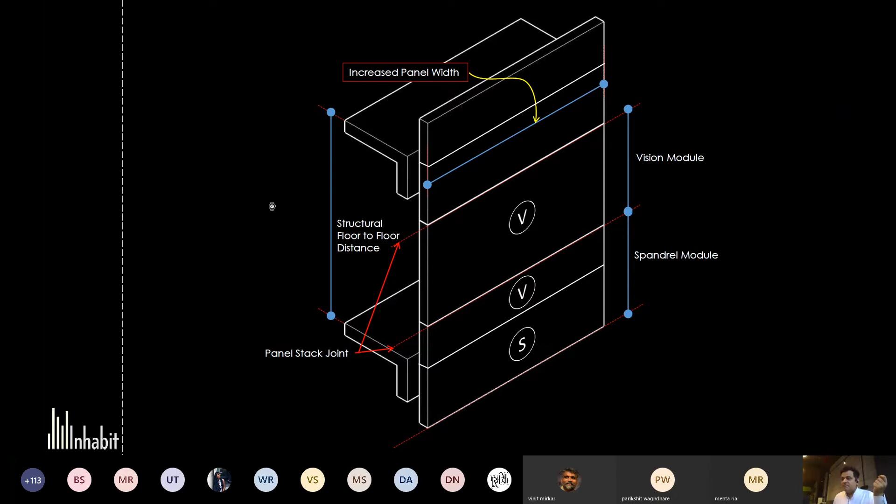They basically wanted to increase the panel width to 3.6 meters. Now, 3.6 by 4.2 is a really large panel. You can't fabricate it. You can't transport it in a regular truck. You can't hoist it. So how do we make it work? So the whole unitizing principle was then flipped over its head by having to split the unitizing in 2 parts. So you have one panel that goes on the slab face, which is the spandrel unit, and then there is another vision unit that's installed from the inside that drops it in.

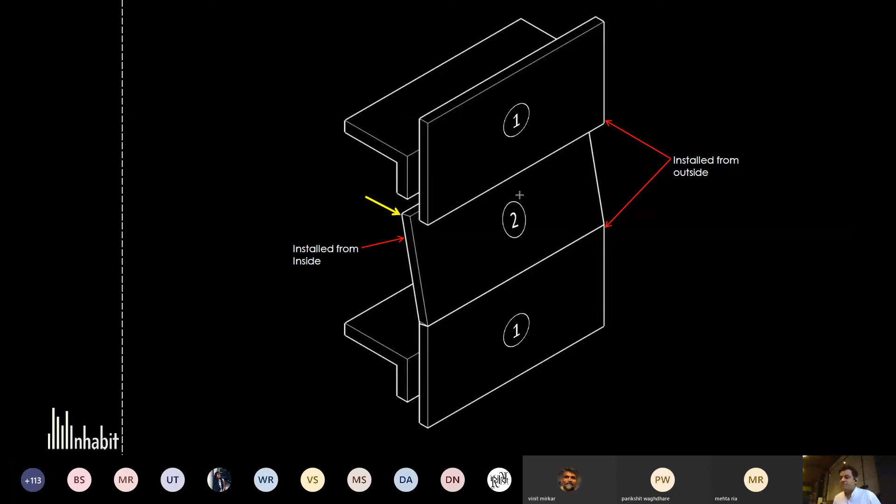So what we've done here is, instead of having a tall panel, we basically rotated it sideways. So it's a nice horizontal panel, which still has the same sort of weight that a typical 1.2 to 1.8 panel has, but it allows you to have a slightly wider panel of glass. Now, typically, for commercial buildings, you may have a typical grid of about 8 meters, 9 meters. Here in India, we designed it to 10.8 meters with high seismic specifications.

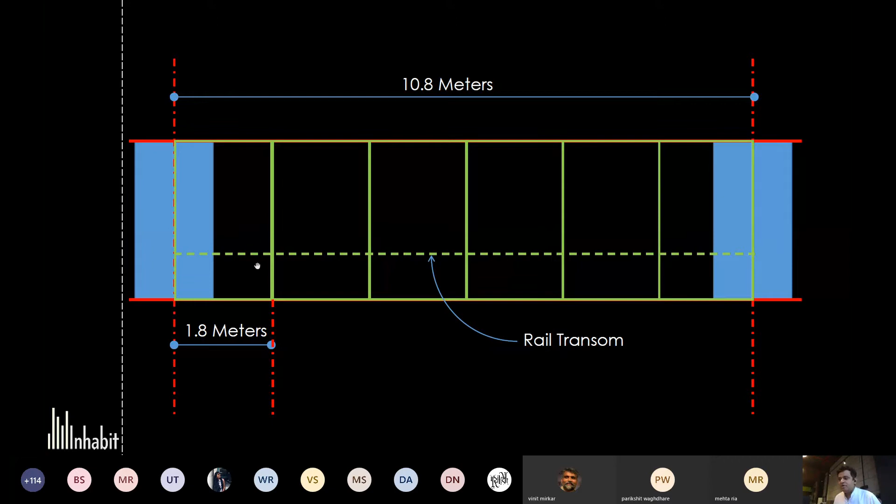Now, if you were to do 1.8 meter panels or a mullion repetition of 1.8 meters, you would get about 6 panels between your column grid. But what we could achieve with that approach is this: we just have 3 panels between your curtain wall grid, and you can see how seamless the view is to the outside. It's super clear, less interruptions.

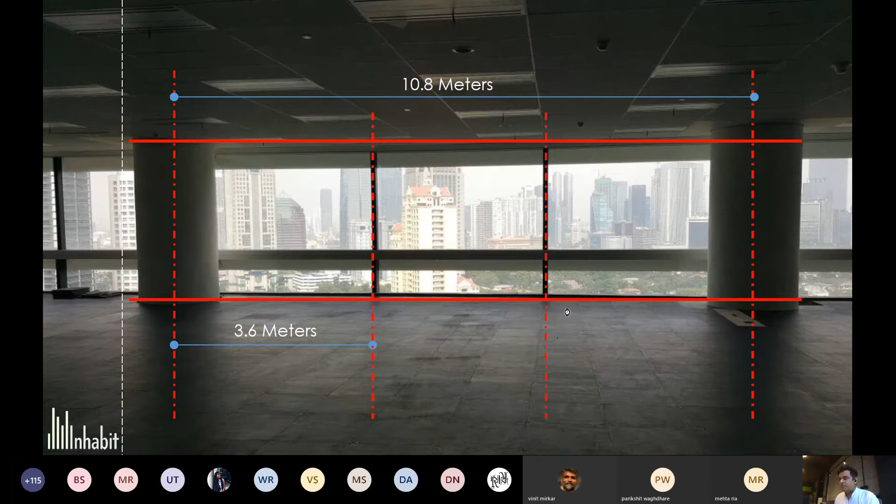What is also quite interesting is that the panel that goes below your desk level, this is a commercial building, so it gets desks all the way up to this point. This panel has a chunkier frame, but then the frame gets lighter as it goes into the vision area which you're looking out of. So that's again a plain Jane where the challenges were in a different place, where you really wanted better visibility to the outside, very high performance facade with lots of shading on the outside.

Now we'll look at a high complex geometry and how do we try and bring it within cost limitations. Again, a very important aspect of practicing architecture, a very important aspect of being able to make solutions feasible without compromising on the aesthetics of it. So this is a project we completed in 2014. Zaha Hadid was the architect for this, and again, this is in China, and China is a very similar market, a very similar construction industry as we have here.

They would really love the concept, but when the prices come back of building a Zaha Hadid building in central Beijing, the prices are off the roof, and then they suddenly start comparing the per square foot price, and it's like, why is this so much more? And we can only afford this, so on and so forth. So I think it's important to then start seeing where the bulk of the cost sits. What are the more expensive elements? What are the low-hanging fruits that you can immediately address by changing them slightly without impacting the building's aesthetic much? You can actually bring the cost down significantly.

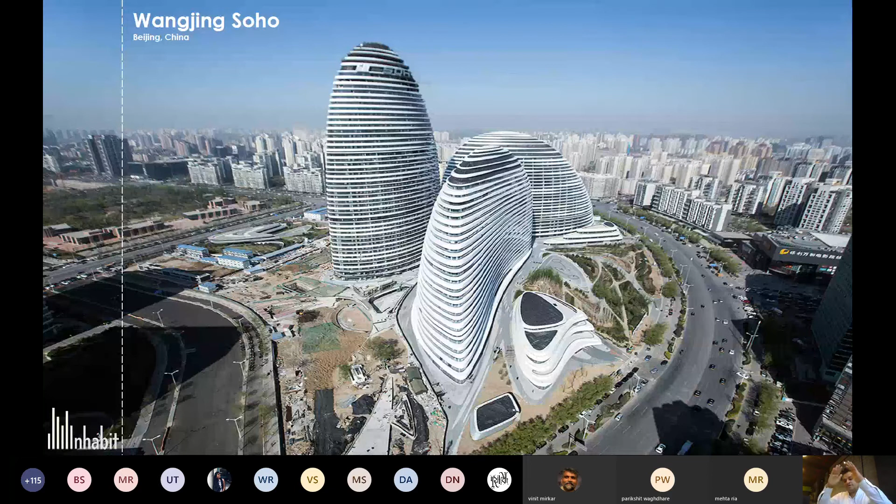Now, the first question was, does the glass need to be inclined? Probably not. Because by inclining the glass, you increase the complexity of drainage, you increase the complexity of fabrication. Inclining glass means it has to wrap and turn around the corners, which means it also has to be bent in shape. It also has to be trapezoidal in nature, which again takes panelization to a really high level of complexity.

So the first port of call for us was to actually have the facade installed as vertical. And to express the building's shape on the outside, we still continued to have the ribbon elements running horizontally at an inclination, wrapping and turning and curving around the building, because it's much easier and much more cost effective to work with metals in an organic form rather than glass or curtain wall, which is the functional barrier of your building. If that goes wrong, the building leaks. If that goes wrong, the building is no more safe to occupy.

So the intention was to actually have these panels installed vertically, which will seal your building. The building is sealed, which means you can start your fit outs, you can start your interior works, and all of these external ribbon panels can then get installed in a parallel program per se.

To basically explore different methods of installation and how do we address the geometry, we even designed a saddle bracket here, which allows to use multiple angle conditions by just turning the bracket over the saddle, and that allows you to use the same panel but in different inclination conditions as it wraps around the building. So small little details that make a huge difference in making the building more and more feasible.

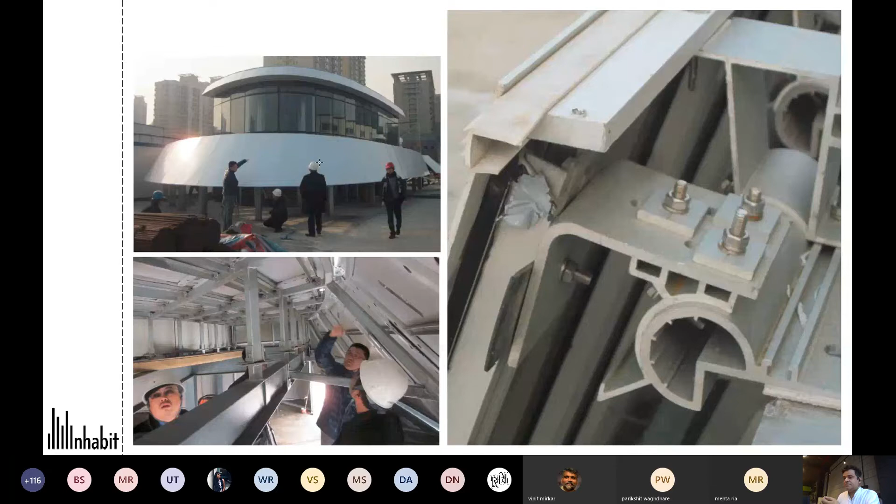Parikshit, let me know if I'm overrunning the time or anything. No, please go ahead. Please go ahead.

The next one is one of my first projects at Inhabit, and this is a building that was an existing building, and we basically had a challenge of adding features to an existing building with brand new materials. We also got to work with a very funky architect who really wanted to bring some nice organic forms onto an existing building, and the intention was that since the building is at a real prime location and it's really aged architecturally, it doesn't look that brand new building anymore.

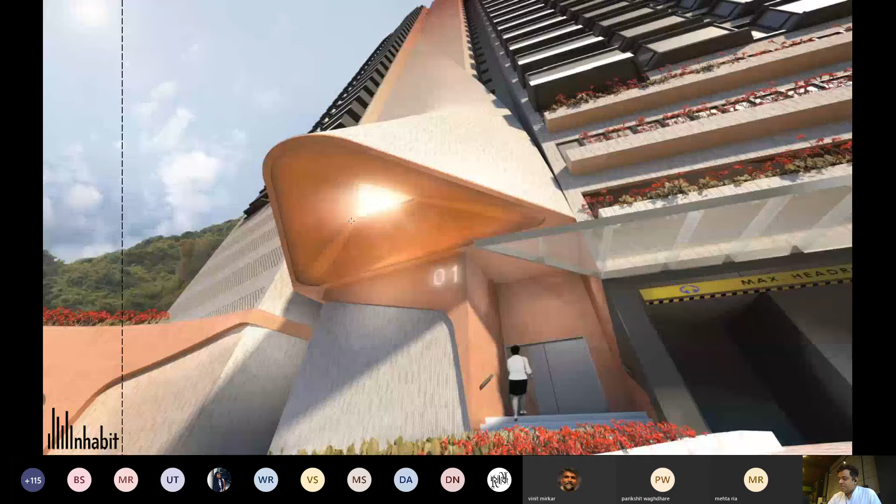Why don't we try and add features to it that gives it that modern look? It completely gives it that facelift that it needs. And at the same time, we try and improve the property value significantly. So one of the things that happened back in the days was the original architect of the building did not provide any canopies. So the idea was to also add functional elements to it.

So we basically had the two cores coming down, and the architect basically peeled out the surfaces to create canopies out of it. Instead of just attaching a canopy, which is almost like you basically stick a canopy onto it, the idea was to basically pull a canopy out. So this is a view looking up the building, and you see the surface, which is all tiles, which basically wraps over and creates this little canopy for you to enter.

And then there's also this glass canopy which connects the two buildings. So the idea was to add functional elements, but also to give it slight uplift architecturally, so to speak. So the first thing was, how do you try and add load on a building that's already built? So obviously there was a lot of back and forth between the structural engineers and us, what kind of load do we add?

And then obviously the intention was that the building was tiled and the tiles were supposed to come on the surface out. So we basically designed this entire steel frame structure, which will have GRC panels on it, which actually is the same cementitious surface that you can adhere tiles to. So the idea was to have the same surface running down.

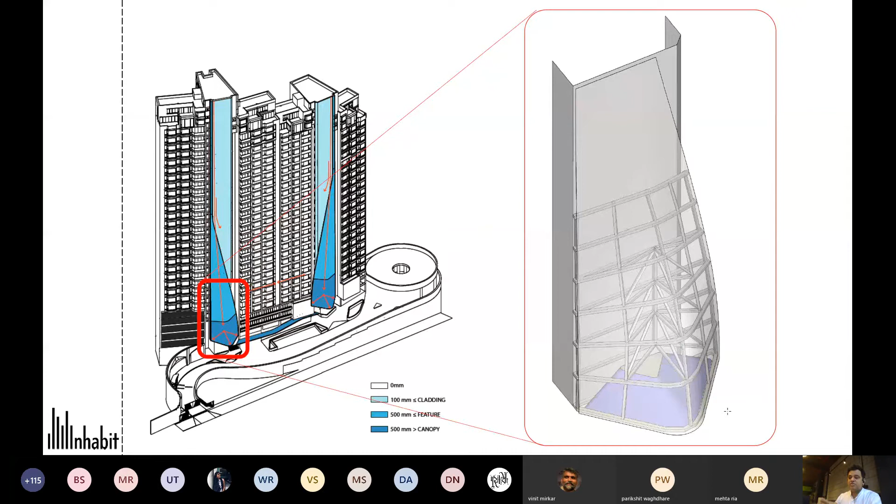Now, one of the key challenges was how do you do a color transition. So the color gradient that the architect has designed was dark ruby red, and the project is called Ruby Court for that reason. You have a dark ruby red on top, and it all the way comes down, gradually changing its color into a warm white all the way down to the base.

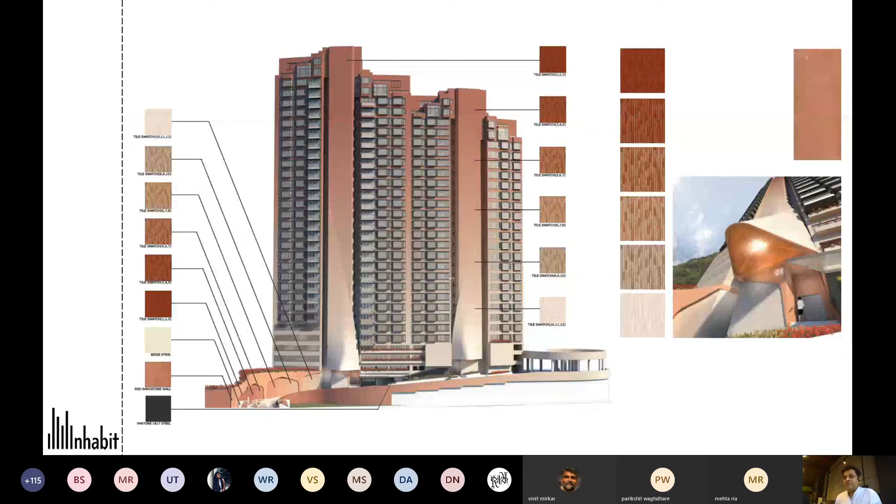And these are not mosaic tiles, not your bathroom small little mosaic tiles. These tiles are roughly this big in size. So the question was, how do you do that on a building this high? I mean, doing a nice transitional gradient in your bathroom is probably easier, but this is 180 meters up in the air. So the first thing we did was to start flexing our parametric muscles.

We basically did a tool to establish what that gradient would look like, and the architects were a little concerned that they didn't want to see or read bands in it, because if you suddenly change one color, you start seeing a seam, and then there's a new color that gets added, you start seeing a seam again.

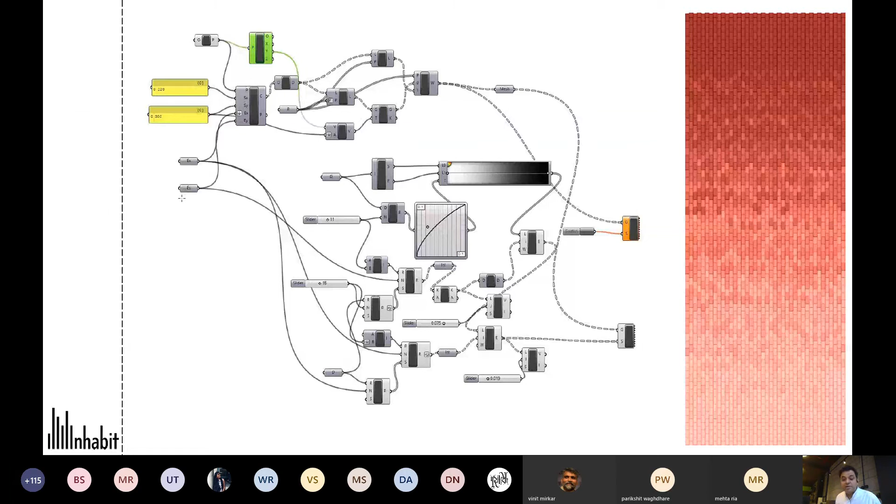So we basically did that little transition, little randomness to it. But then how do you do this? How do you pass this tool on to a manufacturer? Does he understand Grasshopper scripting? Probably not. So we basically simplified it into an Excel sheet which got exported, and every time a color had to change, it had a certain parameter that was already included in the Excel.

And everybody was nervous, like, you've done it all, but can we see what it looks like? Does it actually work? So we actually did a dry lay of that in the tile factory. So these are pictures from the tile factory in Japan, where you have the dark red, the dark ruby red up here. And this is a quarter scale mock-up showing how the tile color would come down.

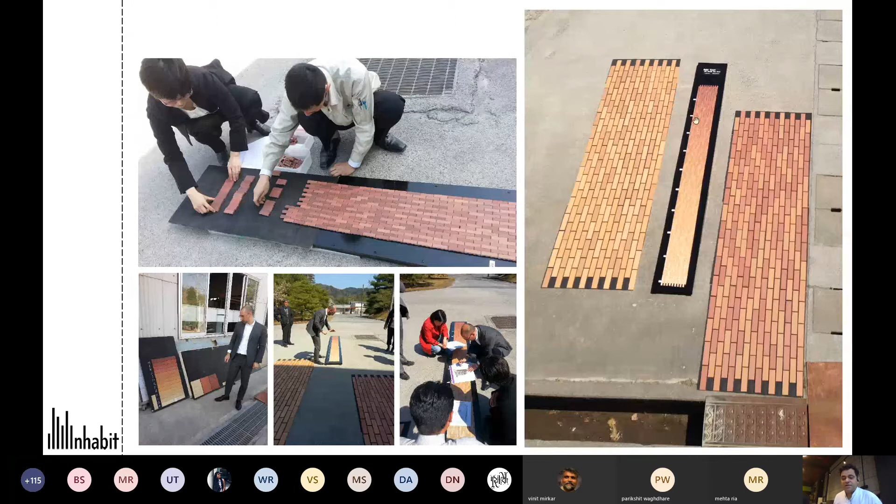And the strategy was that you have the tiles pre-boxed, defined for a specific floor. That box cannot go anywhere else but that particular floor, and then the building is complete. I don't have the images of the completed building, which I should actually include here, but everybody was very pleased with the results. I think I'm down to my last example now.

This one is a unique building by itself. It's not a super tall, but it has its own complexities. It's only 6 floors in height because of its proximity to the airport. And it has its own level of complexity that needed to be addressed from an environmental perspective, from system selection perspective, from completion perspective, and even orientation became extremely important.

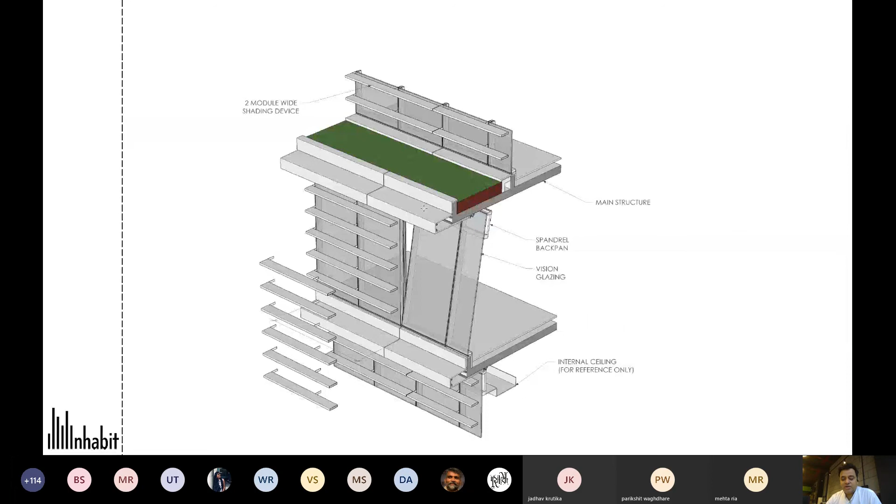Now, one of the interesting aspects of this building was this was supposed to be a Green Mark Platinum rated building, and Green Mark is a building rating system out of Singapore, and they have very stringent requirements for platinum rating. The ETTV value, the external thermal transmittance value of the building, cannot be more than 35 watts per meter square, which is an extremely high performance building.

So purely based on the orientation of the building, the architects had designed it in such a way that they had more shading where they have higher thermal exposure and less shading where they have lower thermal exposure. So the building is perfectly 1 degree north of the equator. It's oriented east and west, and the north and south are the longer elevations, which do get sun, but they get significantly less sun than east and west.

So the intention here is that the north and south will have sparser shading, so it'll have fins on the outside, but they'll be spaced apart. And as the facade wraps around on the east and west, the density of the shading will increase. So they'll start introducing one in the middle at random locations, and then that swoops around.

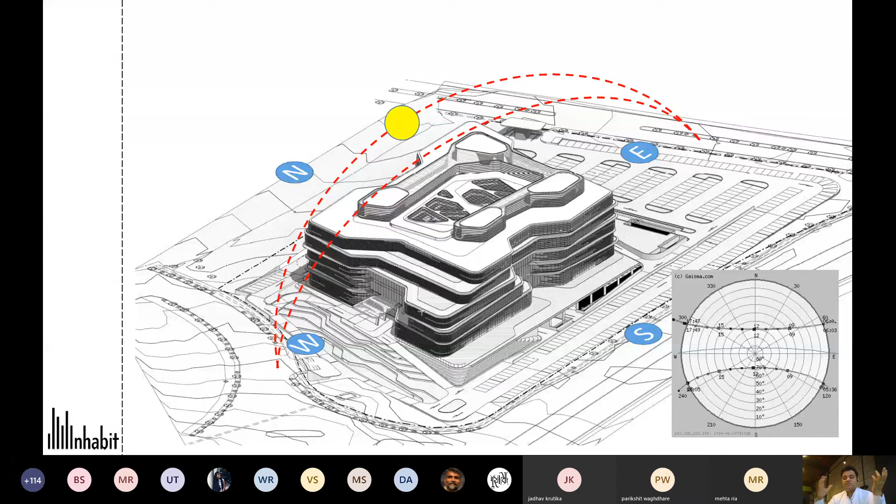So the initial intent was to have 6 shades on the north and south, 12 shades on the east and west. We basically optimized the glass to such an extent that they could drop 1 shade from each elevation. So it was 5 shades on north and south and 10 shades on east and west, which again was a very nice sort of balance from a cost and performance perspective.

The other thing that's extremely important is trying to rationalize your footprint geometry as much as possible when you start designing it, and always keeping it in the back of your head as a principle. Now, what's evident in this view is that most of the faces are relatively flat, but when two flat faces meet at an angle, there's a small curvature to it. So there's a small radius to it.

Now, when you're doing a segmented corner, when you're doing a radius corner, the intention is to use flat panels and segment it in such a way that there's different angle conditions when they meet together. And the intention is to actually have minimum angle conditions as much as possible. So the frame typology also reduces, making the building even more cost effective and more optimized for manufacturing.

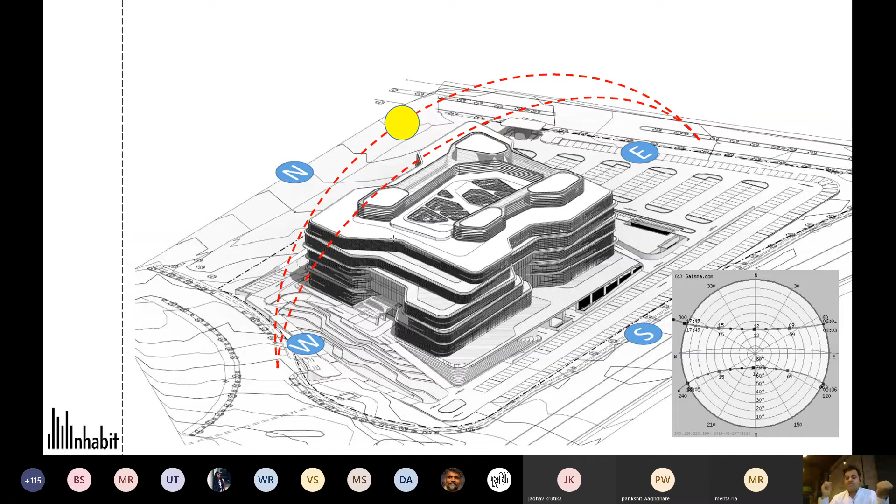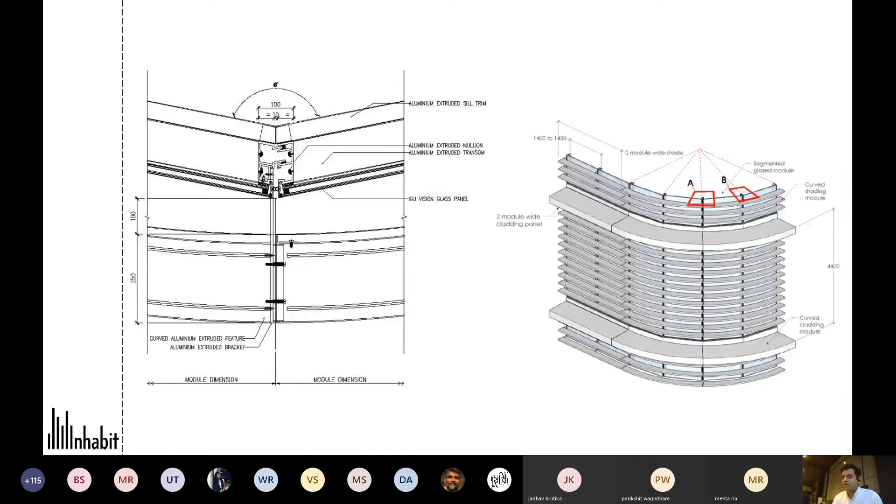So the first tool we gave and worked with the architects is that when you're turning a corner, you basically use a standard template as a kit of parts. So you have a standard 1.4 wide module that wraps around at a certain angle, making this detail common everywhere. So wherever the panel wraps around an inward corner, you have one frame module there, and wherever it wraps around an external corner, you have one frame module there. So it also reduces the number of component types that you're using on the building. That also is a secret recipe to make it more cost effective and more optimized for manufacturing.

So sorry, there's one more. If we have time, Parikshit, if you think that we've overrun majorly, let me know and I can stop at any point. But no, I would please like to go ahead.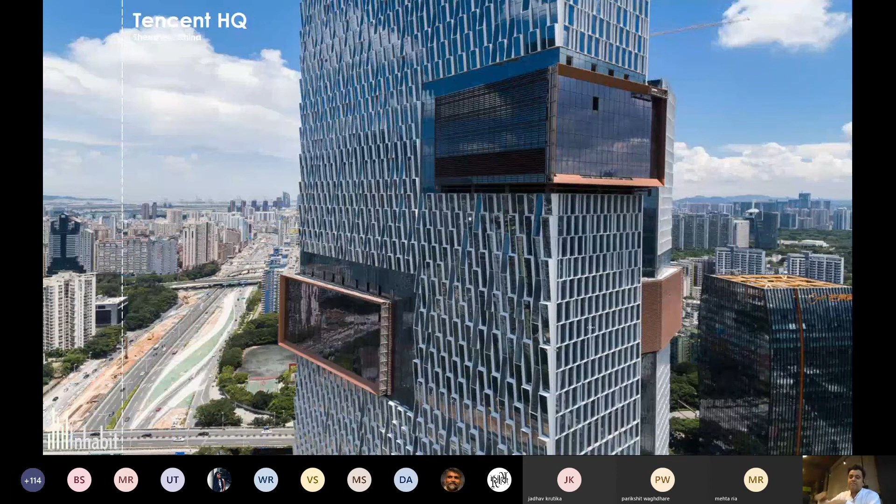So what you see on the outside to the left is a typology which we call vertical sawtoothing. So if you cut the building in section, it has inclinations in section, out or in, out or in. And to the right side here, you have horizontal sawtoothing, and these are all environmentally driven decisions. So a certain orientation will have more shading because of its geometry a certain way. So all of these surfaces are horizontal sawtoothing. So if you cut the plan, that facade is all like a zigzag pattern in plan, while the one on the left is a zigzag pattern in section.

So like I said, manufacturing is the king. If you make the facade more modular, more efficient, the more beneficial it is down the line for someone who's manufacturing it, the more beneficial it is down the line for the client, who can reap the cost benefits of having it optimized at the front end itself. So the first thing that we tend to do is to try and identify how to address the modularity of it. So we start identifying the type A, the type B, the type C, how repetitive can it be, and then also address the sequence of installation.

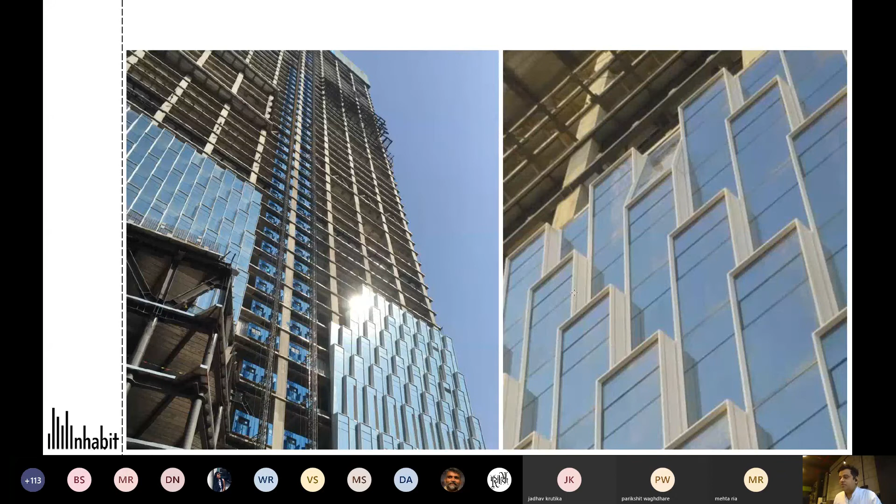Now, each panel has its own geometry, and as we know, gravity works best when someone stands up vertically. If you try and lean outwards or lean backwards, gravity will pull you down more easily than if you're standing up. So that's why all our facades go up vertically, all our buildings go up vertically, so the gravity loads get transferred downwards. But in this case, architects obviously had something else in mind.

So the intention was to push the plane outwards to create the funky geometry that we see in the view. So the intention here was to again try and keep it as panelized as possible, not to compromise on the components that define your water barriers, that define your air tightness, that define your unitizing, which interlock with each other.

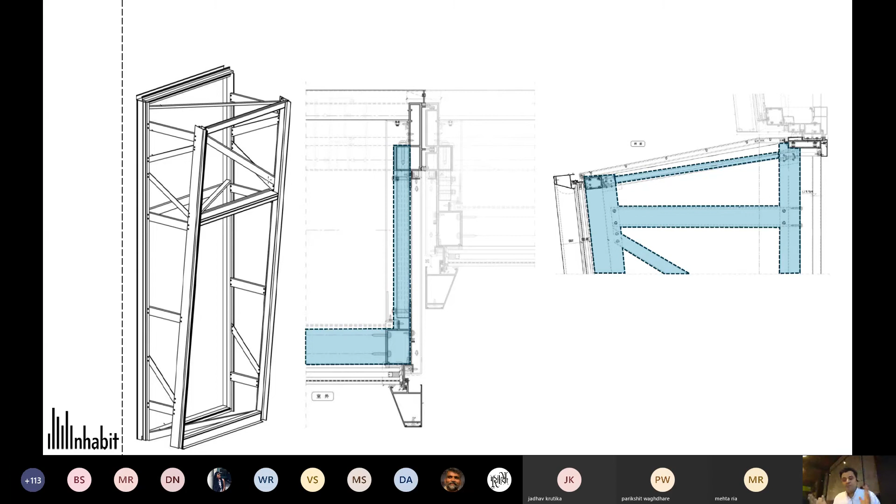So the intention here was that all of your element separation between the outside and inside basically went into the primary frame behind, and all of the geometry fun that happens, which is inclining the glass outwards, was basically a secondary frame on the outside which pushes it outwards, which is connected back to the primary frame. So that allows you to play with the geometry without compromising on the performance of the building.

We also tested it out in a factory, trying to see how much time does it take to put a panel together versus the conventional panel. Is it actually more cost effective to do it this way, or rather just manufacture the whole thing in one piece or piece it together component by component, so on and so forth.

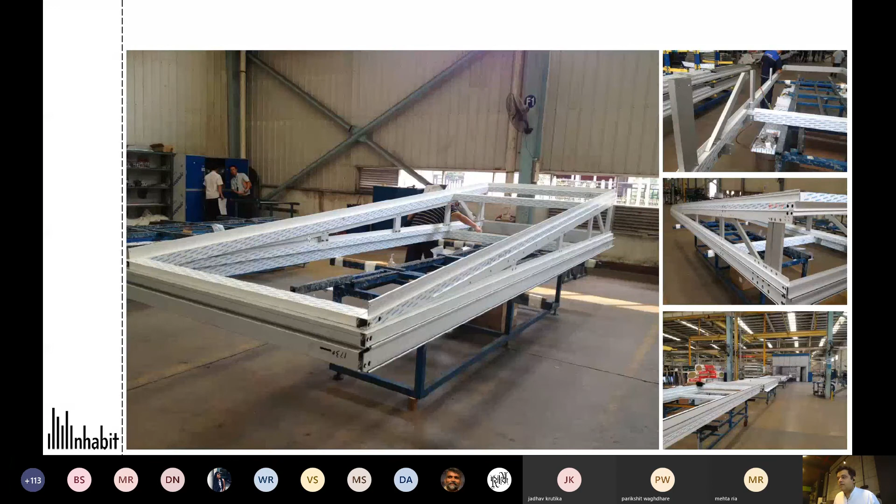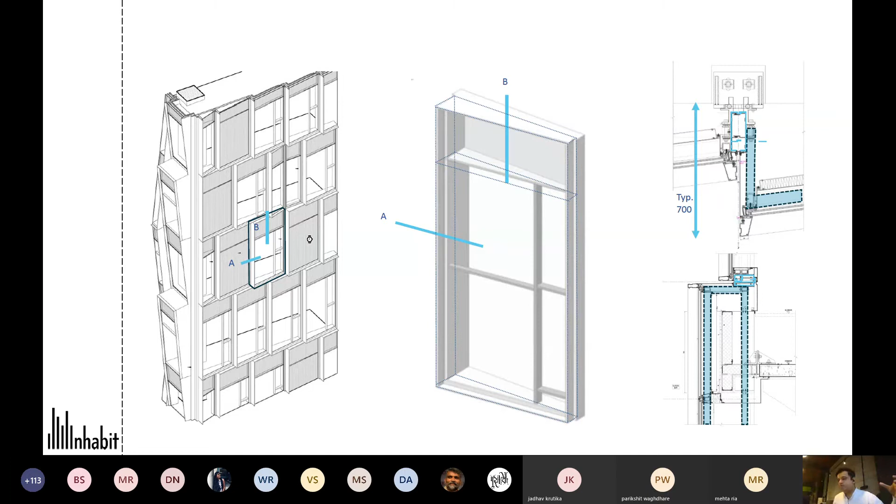The second part, which was the horizontal sawtoothing, which happens on the right hand side, that does not project out as much as the vertical sawtoothing. So there we looked at different ways of addressing it without having to use frames to push it out. We basically had an extruded component which allows you to push it out by various numbers.

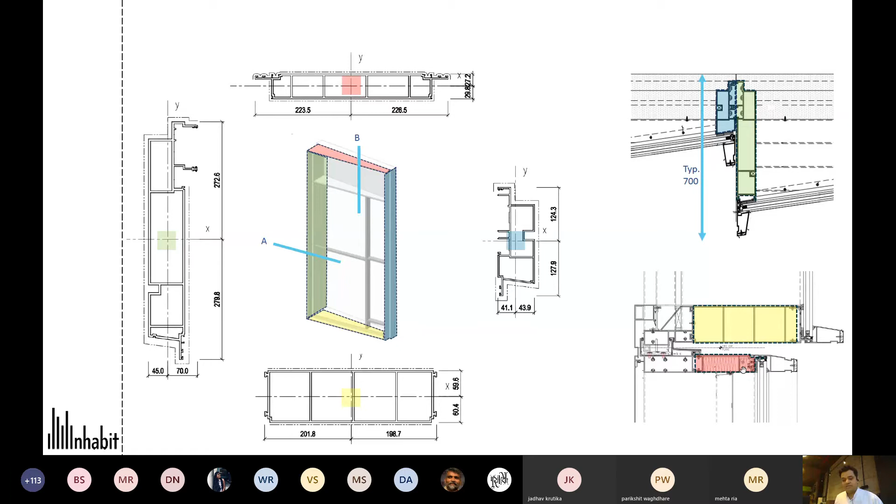So when you see this component here in yellow, that can be sliced or cut at an angle without compromising on its structural integrity. You can still attach the glass to the outside and you can put together a unitized panel that still has all the robust unitizing principles built into the form here. And then all the geometry fun that can be pushed out happens in a secondary component that gets attached from the outside.

So that was a few case studies. Obviously, there's tons more, but I think these basically covered different aspects and different challenges in a very diverse working environment, very diverse building typology. So in summary, we basically looked at where we started off from, how glass came to be where it is today.

We looked at design parameters, which are structural, environment, aesthetics, some brief touch points on costing. We looked at construction parameters of geometry and design, system choices, how do we select a system. Cost again is a variable component and that can be a topic of discussion for another day. And then we looked at a couple of case studies.

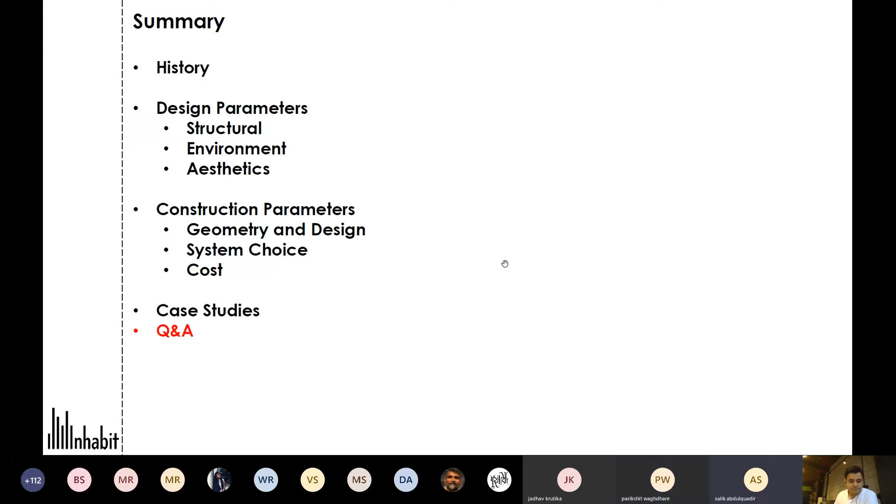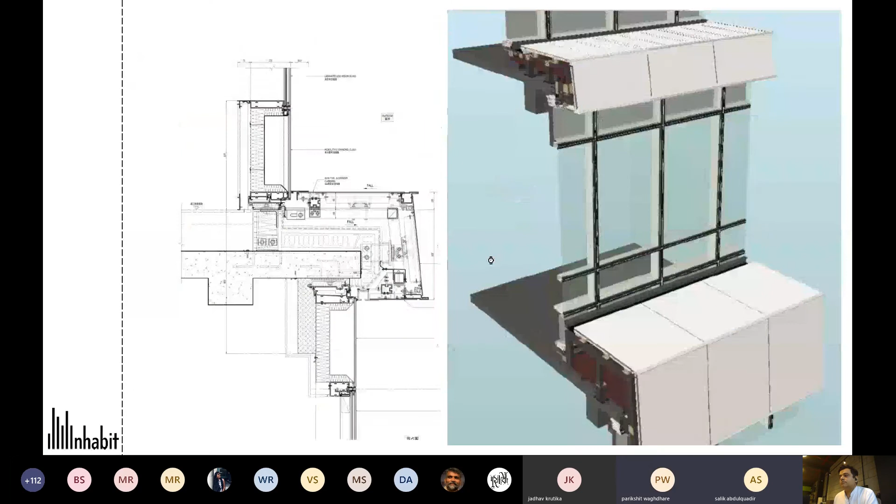Yes, I have a question. My name is Abdul Qadir. In the first case study that you showed, which is the Pertamina Energy Tower, you talked about making the facade which has two curvatures, one vertically and one horizontally. So the solution that was given was that you dislocate one of the corners, you stagger one corner, and then you bring it back by force and join it on the side. Right? So doesn't that put the glass in constant stress and more vulnerable to failure in wind or seismic activity?

Fantastic question. Actually, glass is stronger when it is stressed. And that's the reason why we have glass typologies like heat strengthened glass, fully tempered glass, because it actually increases the surface stress. A good example: if I were to drop something on this piece of paper versus this piece of paper, the one that is bent slightly will offer higher strength. So it can actually take wind loads a little better. It can take seismic loads a little better.

And it's not a one point question. It also went through a series of analysis because it's not purely just glass. It's aluminium that twists a little bit as well, so the connection points and the kind of stresses you generate there. There is a silicone that basically glues the glass back to the frame that goes through some kind of permanent deformation, permanent stresses. So here we basically went back to the industry saying, we think there is X amount of stress in the glass, is it okay or not? They signed it off. There is X amount of stress in the silicone, they signed it off.

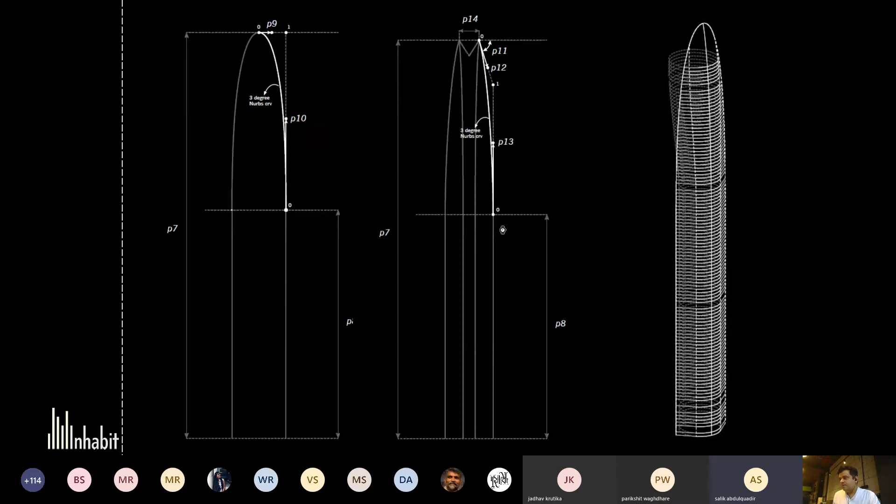So based on that, we arrived at a number that can only be twisted 20 mm off the plane. Right, understood, sir. Also, I had a question about this. There is a groove which is running across the center of the building. So there's a what? Sorry. So there is a groove I can see in the view that was shown earlier. So there are two faces, and then there is this one. Yes, sir.

Right. So this particular groove will have more wind load as compared to the other part, right? So the structural system would change over here, or will it continue? So there's another presentation which is more wind specific, where they basically arrived at the form based on an evolutionary process. So I agree, if you have a cleft like that, there's a small cleft which will capture more wind, but then the intention was also, which is not very visible here,

right up here on the building, there's a wind turbine. So the idea was to channelize the wind up into the wind turbine. So wind coming from any direction, it basically captures it and then generates energy out of it. Understood, sir. That's it, sir. Thank you so much.

Thank you. Any more questions? Yeah. I just have one suggestion. Can you just give some guidelines to the student about the window openings for tall buildings and fire safety, and the cleaning also along with it?

Right. So in outline, as the buildings go taller, the opportunities to open windows fully become more and more risky, more and more dangerous. So we basically follow some of the very stringent codes that have been written around tall buildings. And the intention is to not open a window more than 100 mm when you go really tall. And the reason behind that is child safety.